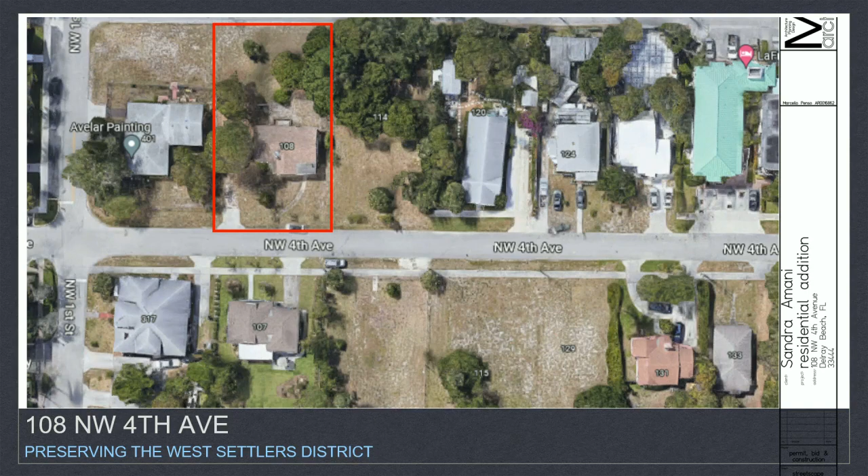Not sure really what to say about this, but in detail I'll just flip through. Please stop me if you have questions, the architect is here and he can answer them. I included the interior just so you could see the layout. I think that the extension adds tremendous functionality to this beautiful cottage, and it will help it work for a modern family to live there.

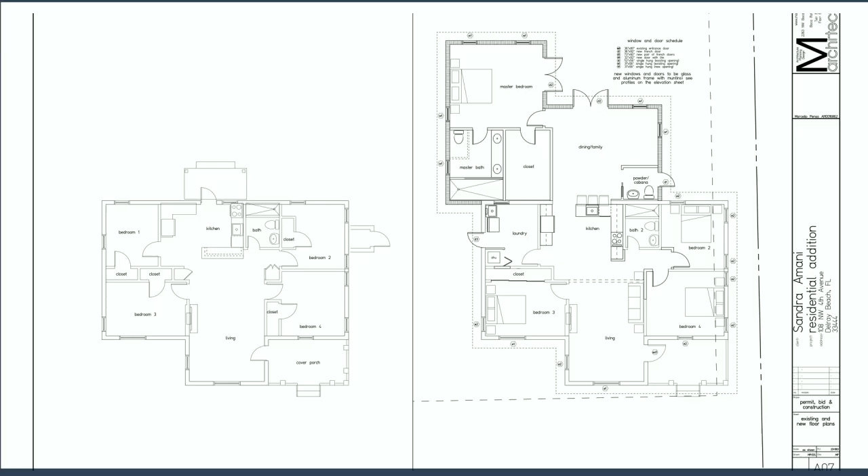Inside, we plan to duplicate some of the traditional interior. We're keeping the fireplace, we're keeping the floors. I think it's going to really maintain the historic look. And that's it, I'm going to sit down.

Once again, this is Agenda Item 8A for 108 Northwest 4th Avenue. Here we have an aerial with the subject property outlined in red. Northwest 4th Avenue is to the east, with Northwest 1st Street to the south.

I'm going to read some brief history on the property. The subject property consists of Lot 15, Block 27, Town of Delray. The property is located within the locally designated West Settlers Historic District and contains a contributing one-story masonry vernacular structure constructed in 1949. The structure's architectural features include a stucco exterior, chimney with flat cap, a covered front porch on the east facade, porthole gable vents on the east and north facades, and flat stucco windowsills.

Here we have the existing survey with the existing structure highlighted in blue. The structure currently is primarily situated on the northeast corner of the lot with an existing nonconformity for the north side setback.

Here we have the proposed site plan, again with the existing structure highlighted in blue, the proposed addition highlighted in red. There are some ground level improvements also proposed, including a driveway extension of the existing concrete apron, pavers around the pool, patio decking, and some stone pavers. There's also a dedication in the rear, which all of the pool and addition comply with.

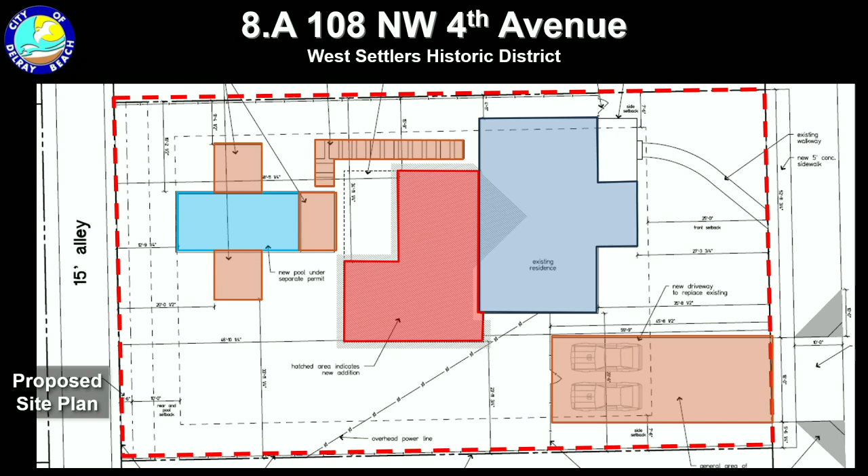Here we have elevations. On top is the existing or front east elevation, facing Northwest 4th Avenue. At the bottom is the proposed front or east elevation. New elements are highlighted in red, including new shutters, railings, beveling of the columns, and a portion of the addition visible from the front facade.

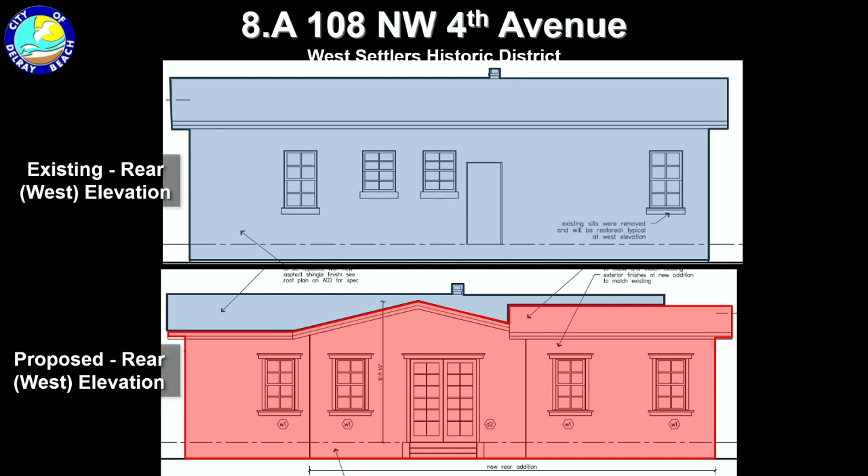Here we have the existing on top, again highlighted in blue, and at the bottom this is the rear where the addition is primarily located, visible and highlighted in red.

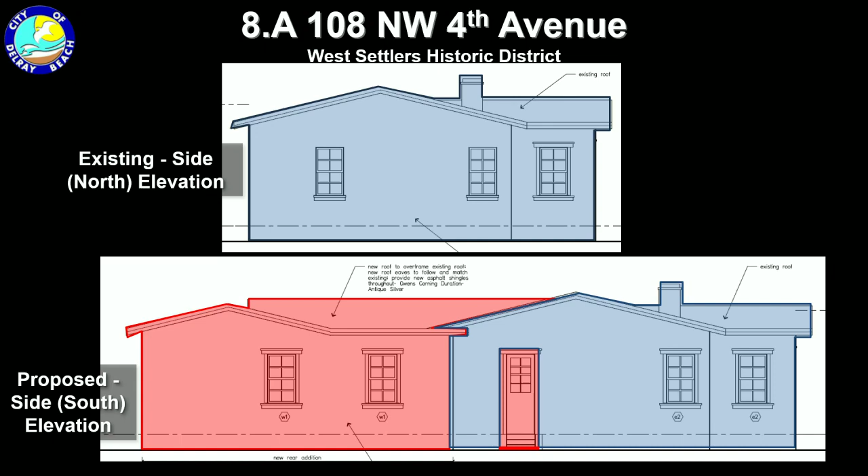Here we have, again, on the top the existing, and at the bottom is proposed in red, the addition on the left, and then a removal of a window for a door on the existing structure.

This is the proposed color materials form. You can see the colors are neutral, muted, and are considered appropriate for this structure and modification.

And we have the Secretary of the Interior standards with the items used primarily for this proposal highlighted in yellow. Same thing here with the visual compatibility standards.

We have a staff report excerpt that discusses the portion of the addition that is visible from the public right-of-way. While it is visible, it is set back significantly and compatible with the existing structure, and helps with differentiating it from the existing structure.

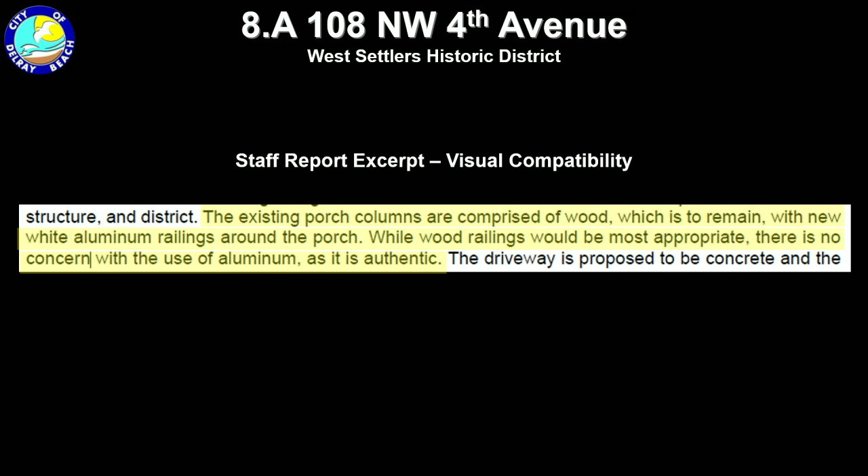And then we have this other excerpt here, which talks about the material of the railings, proposed to be aluminum. While wood is most appropriate, there's no concern with the use of aluminum, as it is also considered an authentic material. And here we have the site plan technical items for the proposal.

And our findings that we used and for the board to use when analyzing this project. And that concludes my presentation.

Any rebuttal by the applicant? Mr. Chair, if you just address public comment first, and then go to rebuttal and cross-exam. She catches me every time.

Any public comment? I see some neighbors back there. Please come up. If you'd like to make a comment, just come up to the podium, introduce yourself and your address, and let us know if you are sworn in.

Good evening. I'm George Williams, along with my wife. Oh, Lottie. And you want to introduce yourself? I'm John Morgenstern. George Williams is the president of the West Settlers Neighborhood Association. I'm a block captain for it. We also live in that same block. If you guys want to just give yours separately, you'll each have 3 minutes.

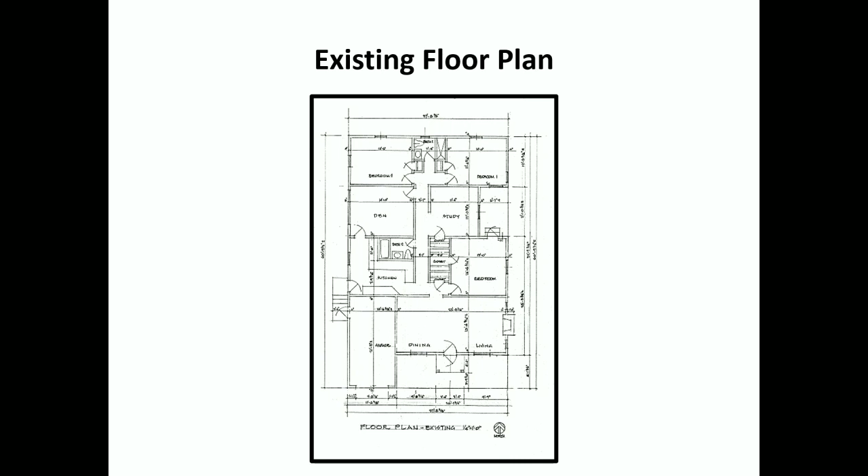That's the plan that you approved. Actually, that's the existing right now - that's the existing floor plan today. You can see the sidewalk out there. That's the proposed.

I don't know if you want to go through the whole scene or not, but basically, it's a simple thing. That's what the house will look like when it's raised as compared to what it is now. We tried to keep within the visual compatibility and streetscapes, everything it required, so I think we have presented what is necessary.

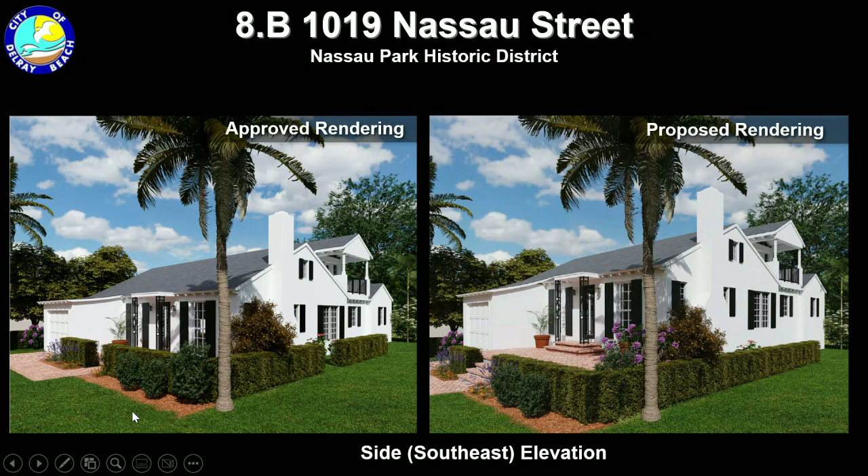This is the requested demolition plan. In addition to the raising of the structure, the request also included the existing first floor where the second story is to be placed. I believe they're requesting demolition for the exterior walls. This was not part of the original approval, so they're bringing this forward today. It's less than 25%, so according to our regulations for historic demolition, if it's under 25%, they're not required to do a full demolition request. But they are coming before you, and this is included in the request today.

This is a site plan technical item we have - we do see the request here, but we're just asking for the demolition plan to be a little bit more clear, just for records, but also when it goes to permit, we want to make sure whatever's being requested is no more than the 25% that they're asking for.

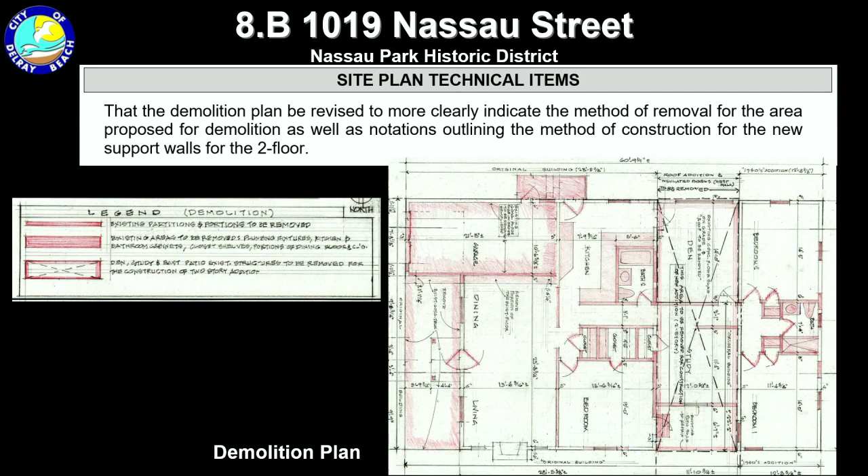Okay, so on the left side, this is the existing front elevation, and then here you can see the proposal. Mr. Simon did mention that they originally came before to request the widening of the garage.

With this additional proposal, they're also changing the height. I believe it was originally 7 feet, and they're enlarging it by 2 more feet, so it's 9 foot total for the height, as well as the raising of the structure. They're also widening this front porch here.

We've also included the approved elevation, so you can see changes that were previously approved. We see the 2nd story, as well as the changes to the driveway, which also included the widening of the garage. Then we have the proposed next to it, so you can see the differences.

This is the east elevation, we see on the existing this window here that was removed. The proposed, you can see the porch here as well as the vertical elevation.

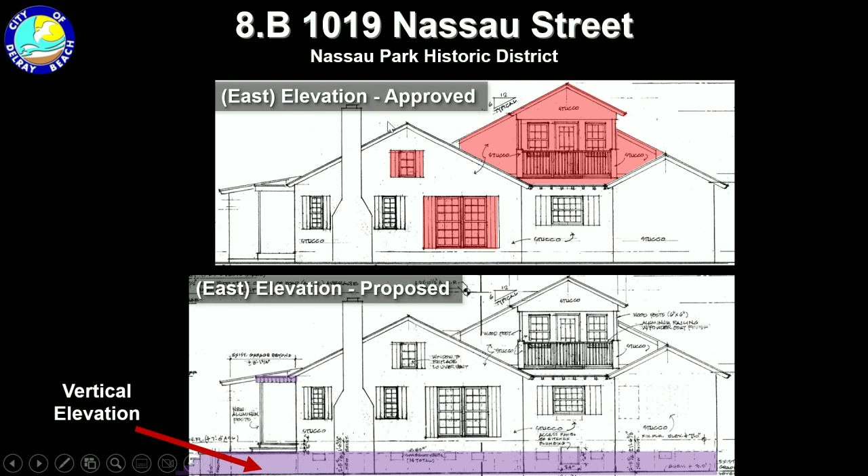The approved elevation for the east, we see the 2nd story. There's some additional changes to the windows, and then we can see the vertical elevation.

This is the existing north elevation on the left-hand side. We can see there's changes to the window pattern on this side. I can go to the other one, and then the proposal, we can see the elevation.

So this was what was approved. We see changes to the windows - they've included the 2 windows as well as the 2nd story.

This is the existing, on the top, the existing west side elevation, and then we see the proposal. As Mr. Simon did mention, they are including a new set of stairs here, and then we can see some changes to doors and one window on the side.

There were previous modifications to the windows and doors that were approved with the last request. We can see 2 more changes here in addition to the vertical elevation and the construction of the new stairs. These are the building materials.

These are the same that were approved, so there are no changes with regard to any materials. So there are no concerns regarding materials or colors - they're all for what were previously approved.

These are excerpts from our staff report. When we talk about the Secretary of the Interior standards, we did have some concerns with the modifications to the windows and doors that were being requested, mostly because in the last request there were already modifications, and because this is a contributing structure, including the front elevation, the more changes there are, the more we're getting away from the historic integrity of the structure. So we did have concerns regarding that.

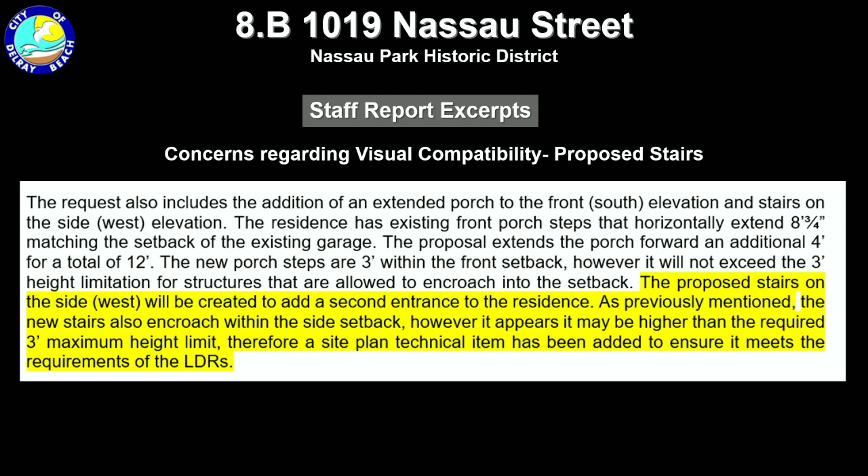We also had some concerns with the stairs on the west side. We have a maximum 3 foot height limit for structures encroaching within the setback, and here it was fine because they did meet the minimum 3 foot, so there were no concerns.

But we had some discrepancies on this side because the finished floor elevation says 4. So we did have a site plan technical item that wants to make sure the site plan or elevations are cleaned up to be consistent, to make sure this does meet the 3 foot requirements.

Regarding visual compatibility, as previously mentioned, we had concerns regarding changes to the openings. There was already an approval to change the width. This request is changing the height too, so this is just more alterations from the existing front facade.

Here was the approval. Oh, this was the existing elevation. We can see there were changes regarding the windows and the change of style of the door on the existing structures, as well as the garage. And then the proposal...

...along with the front porch being enlarged. We also have the height of the garage being modified as well.

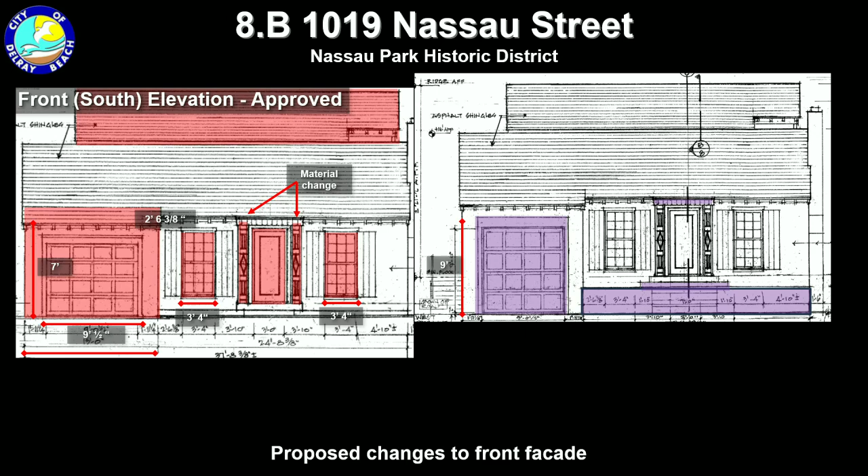Regarding relocation, we do not have any concerns. This is in a flood zone, so vertical elevation of the structure over time will protect it from any flood or FEMA requirement issues. So we don't have any concerns regarding the vertical elevation request.

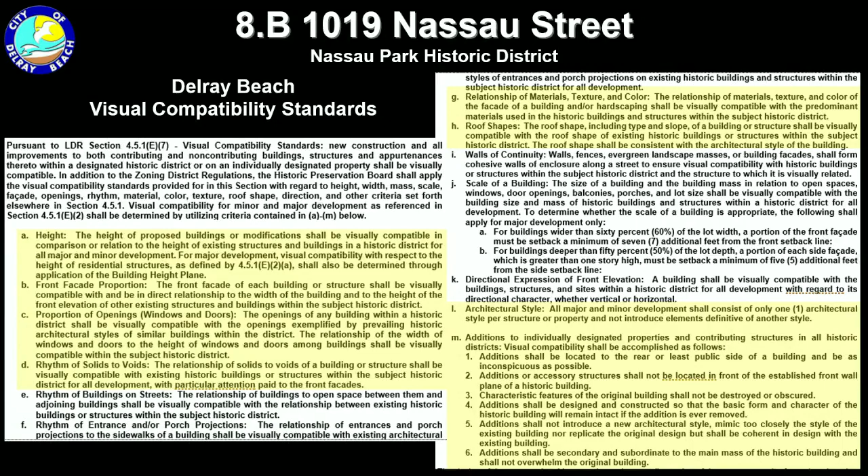Highlighted are the standards that apply to this request, and the visual compatibility standards that also apply are highlighted. These are your findings. And these are the waiver findings, which I think we need to remove, since those were from the last request. Regarding the waiver, it was for secondary and subordinate, so the modifications happening with this request do not affect the changes approved with that waiver.

These are a list of the site plan technical items. And that concludes my presentation.

Any public comments? Yes. Hi. George Law, 46 North Swinton.

I can't imagine you turning down a request to raise a house in a flood zone, but I'd like to read you something just to look at the broader perspective, to keep in mind when somebody asks to raise a house. One of the most celebrated modern houses ever built in Miami-Dade County, by famed architect Alfred Browning Parker's waterfront Sea area home in Coral Gables, appears headed for eradication by a Texas construction mogul who paid $36 million for the masterpiece in August to tear it down. It seems if it falls, as seems probable, the house would be a victim of one of several developer-friendly pre-emption laws passed by the Florida legislature to restrict local officials' once routine zoning powers. This just brought that to mind. There are people who will come and tear down a house like that if they could, and just say well, it's in a flood zone, I can do it, state statutes cover me. Anyway, please approve this.

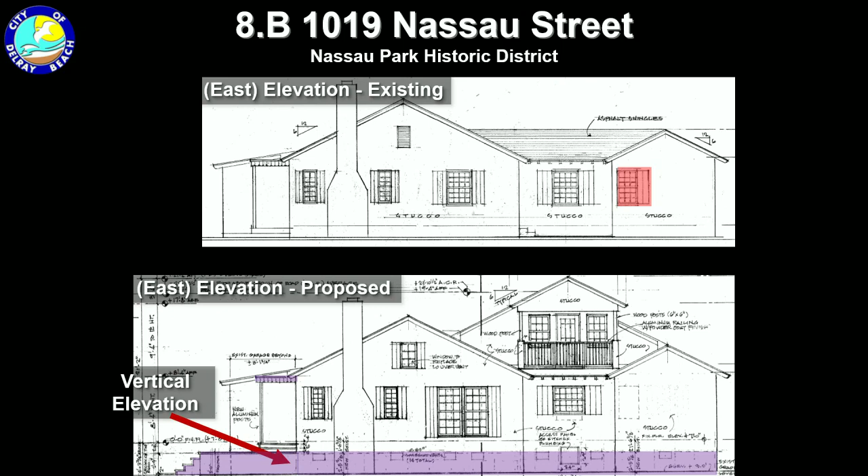Actually, it is on this plan. You can see right here, faintly, this little square or rectangle. They have flood vents underneath, venting for the underneath portion of the house, but what I think was missing is on the garage. In this area, flood vents will need to be installed, so they'll look like the other vents. That's a FEMA requirement as well, because the garage will be remaining at the existing finished floor elevation.

Those were the rebuttal items that I had. So, thank you. I think we're ready to discuss at the board level.

Anybody want to go first? No? We can vote for Chris to go first. No, I'll go first.

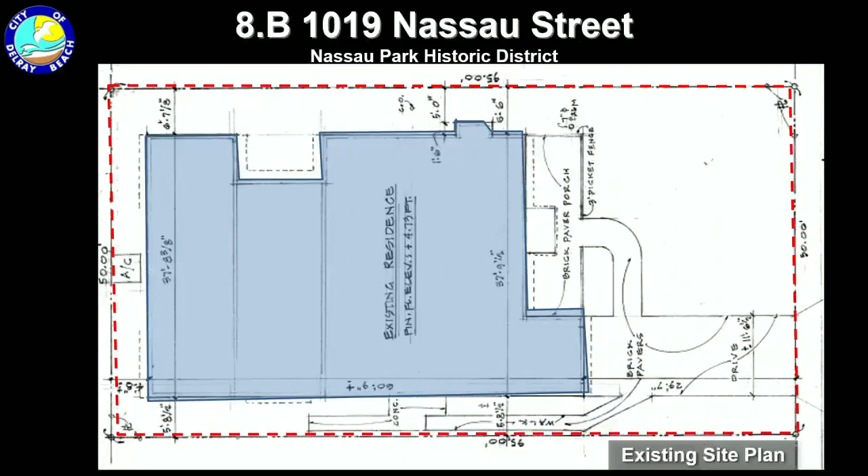I can see how we arrived here. It's a beautiful home, a beautiful street and neighborhood, and it would be a shame to lose this house. There aren't many alternatives, and I think this is probably the best one. It does affect neighbors, and that's unfortunate, but to preserve the house, it's going to have to come up. We see what happens when it rains here, and it's real. So I have to support it. I think it's going to be a beautiful project and an asset for the neighborhood.

Chris? I agree. I think raising the house is the practical approach and the right thing to do for the long-term health of the structure. It's unfortunate that the neighbors might have to see a little bit more. There was one image showing the neighbors' houses, and it looked like with the raising, it's still at the same height as the neighbors' elevations. Is that accurate? It was showing the streetscape with all the neighbors' houses, and it looked like the roof line was going to be at the same height as the other neighbors' houses.

Oh, you want to go to that? Katharina's going to go to that. She believes it's in Roy's drawing, so we'll bring that up for you. Mr. Simon, if you want to come to the podium, if the board has a question, please come to the podium.

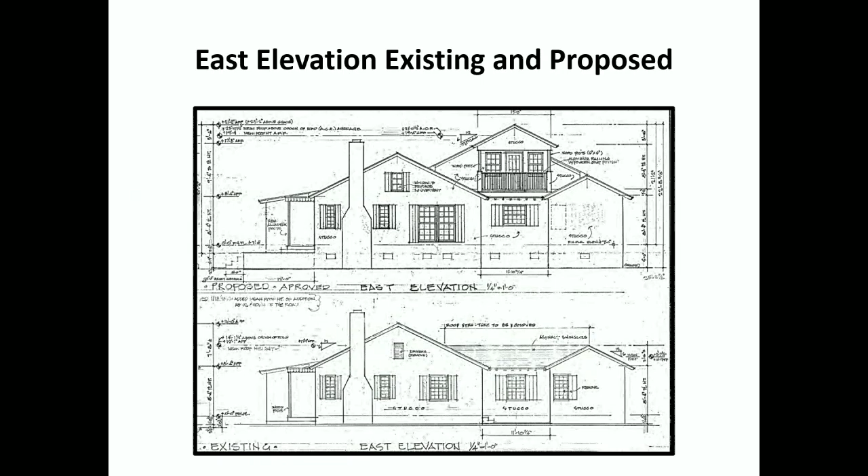And if that's accurate, it shows that even with raising the house, it's still at the same level as the direct neighboring houses to the left and right. It will be higher? Okay, I wonder what that was showing. These houses, when originally built, were built about 18 inches above crown of road. Nassau Street comes down on a hill from A1A, so it's lower at the west end of Nassau Street as you get closer to Venetian. There is flooding occurring in this area, but these houses are all at that 18 inches above crown of road, so they're about 4.5-ish feet. All of them are.

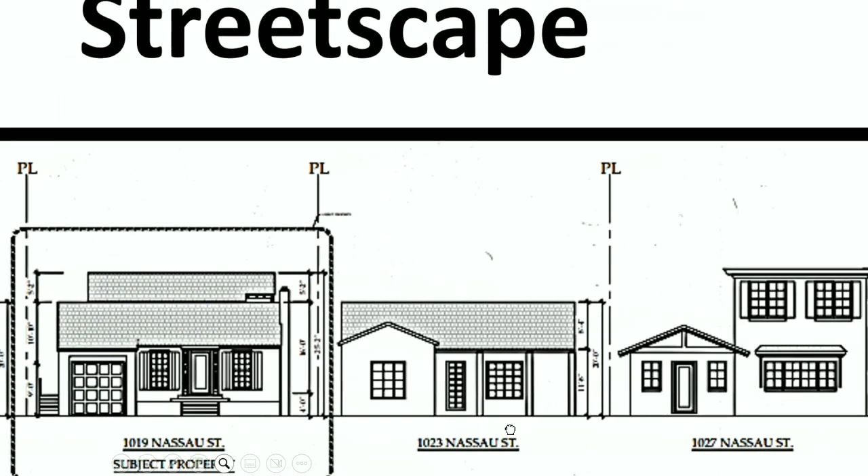There it is, this is what I was looking at. So what you're seeing here is that the house is still touching the ground where the other houses are. Can you zoom in a little bit? That's what I'm going to do. But the difference here is you can see their porch, that's what all of this is. So really the front door is kind of the test you look at. Look at how much higher the roof line will be. The whole house should be lifted up from the neighbors. So you can see in these houses where their front doors are, this front door is up in the air.

Now with the Secretary of the Interior flood adaptation guidelines that we've utilized in conversation with all of our owners facing these challenges, there are a number of different approaches. Most of those approaches work better for historic properties not almost at sea level. Outside of this area, you really can't abandon the lowest floor, which a lot of buildings do—they abandon the lowest floor, make it storage or parking, and utilize upper floors. There's not a lot of room around the perimeter of this property for trenching, and there's a whole method of how you do resiliency with that approach.

Most of the approaches that are going to work for our area are vertical relocation, vertical elevation, raising the building in place. The alternative is they could leave the house at its current finished floor elevation, but they would have to seek a variance from this board in order to allow the structure to remain. This board's approved those types of variances in the past. It's just what the board decides with the owners.

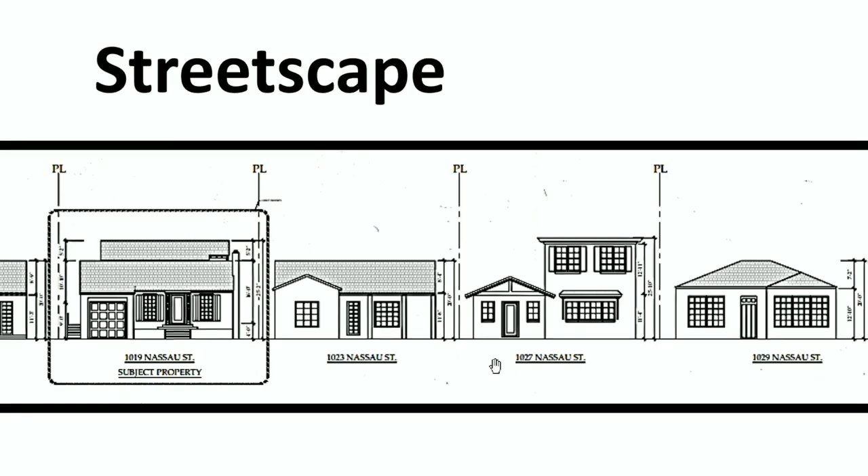I wanted to ask staff if they had any issue with the 9-foot height of the garage, because it does feel like it's out of scale to the rest of the house. According to the Secretary of the Interior Standards and Visual Compatibility, it's the front elevation of a historic structure, so it's up to the board to decide whether that's appropriate.

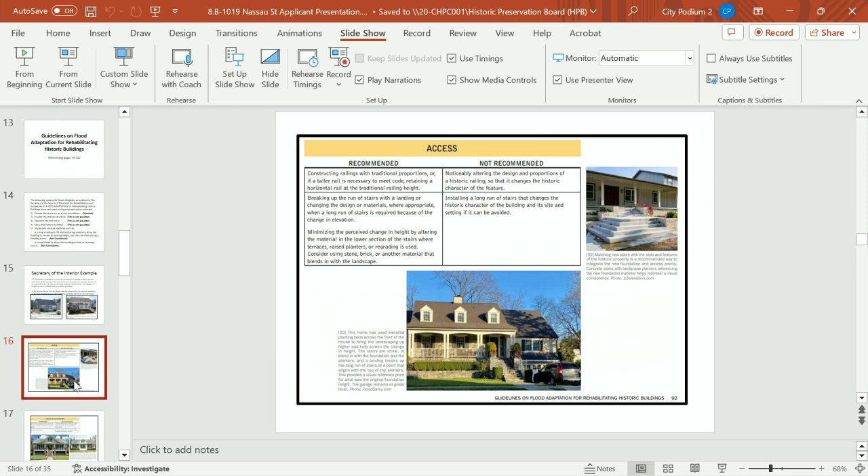That's a concern that I have, is that if you put a person to scale, a 6-foot person, next to a 9-foot garage, it's a very large garage. You can tell with the two elevations on my screen that's going to be a drastic change to the front facade. I do appreciate the owner not raising the property grade. I think that's going to keep consistency along the streetscape. And if you did do that, you'd have to retain your stormwater, and you can't do that. So I think raising it is the only approach.

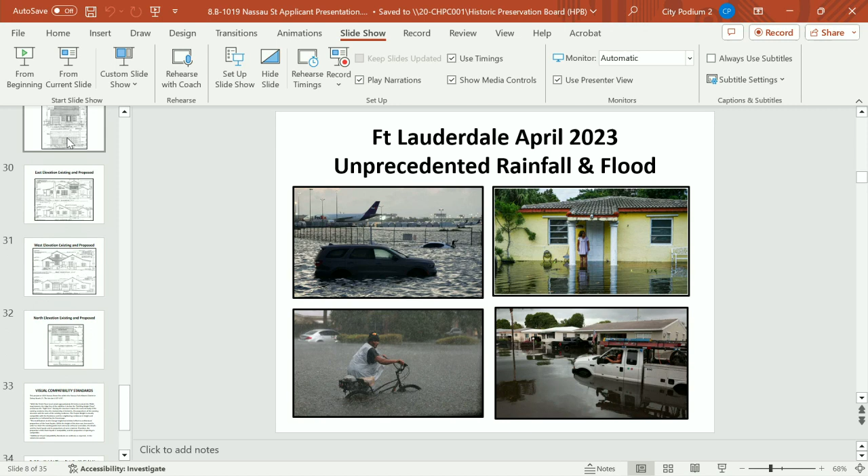I wonder if raising the driveway alone solves the answer. Probably not, but that's the one concern I have, with the garage door. I went through this in my mind and realized why Roy came up with this. It really has to do with the rhythm of that front elevation. He had to maintain that when he raised the house. A 9-foot door on a house like this is very unusual in height, but it makes sense for this elevation. If you see the relationship with the windows, before and after, the relationship is maintained. Roy, you can speak on that if you like, but that's what I see.

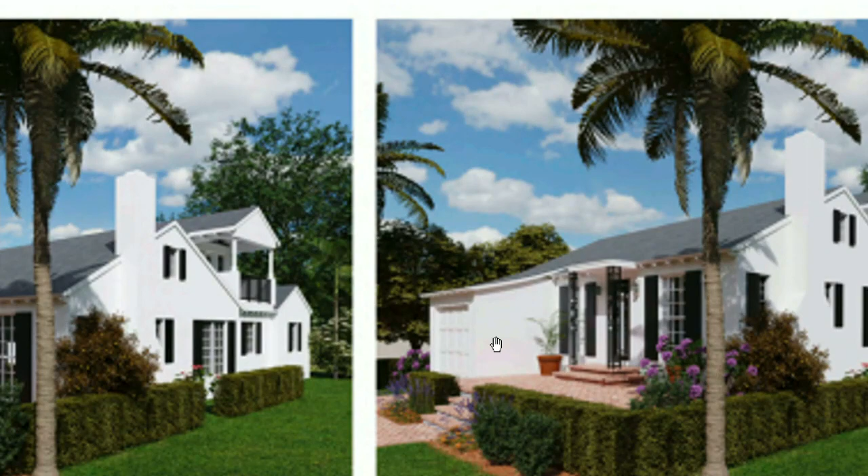Well, I guess we studied that. We felt that if we raised the garage floor, we'd almost have to raise the grade, and that would be a no-no. So we were kind of stuck between a rock and a hard place. I could try elevating the garage and raising the floor, getting some kind of agreement with the city, but then the city engineer gets involved, and I don't know if we can solve all of those people at the same time.

We've been working on this thing since April. Actually, we started in 2021. So we just, whatever you'd like to do. I mean, we tried to do our best to solve the problem without bothering the neighbors. Sure, we can try it, but I don't think we'd gain more than about 3 or 4 inches.

While Roy is here, may I ask a question? Go ahead. So Roy, when you're vertically elevating this whole structure, how are you increasing the height of the garage walls? Are you adding space at the bottom? The wood frame will rise. And then you're going to add more down below? The stem wall will come on up. Yeah, the same stem wall that's being built for the rest of the house.

So you could bring the top of the garage door opening down a little bit so there was more of that header. We could reduce the head, yes. But I wanted to kind of keep it close to where the head of the windows are.

I think it's a thoughtful comment by the board. I think I can make an adjustment on that, maybe add a 4-inch slab to raise the floor a little and get a little apron on that. I'm thinking maybe instead of doing any kind of floor changes or ground level driveway changes, the change that may appease the board is that you frame the top of the garage header down a little bit so that there's more space at the top, but the garage door is still an 8-foot door. That was really my intent, to try to get it more in proportion.

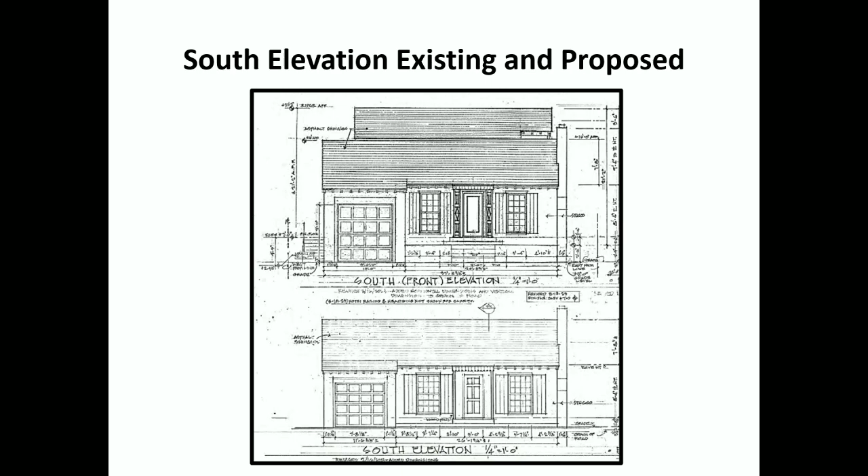But so I'm okay with a lot of the little tweaks that have been made to the windows and the doors. We got to take the big picture here. The house is being saved. The basic structure, form, size, footprint of the house is staying the same. There's going to have to be some accommodations made to make that happen, and I'm okay with it.

I understand, Chris, your concerns, and I agree. A 9-foot high garage door is high. It does sit a little bit more prominently forward of the house than the front door, which is, again, one thing we don't like to see in a historic district, but that's the way this thing was created, and I'm not going to second guess Sam Ogren, I believe, who designed this.

If somebody wants to craft a motion to lower the header a little bit, I'm fine with that, but overall I'm in support of the project. Kristen, did you have any other comments? No. Okay. Ivan? So I do have a few comments.

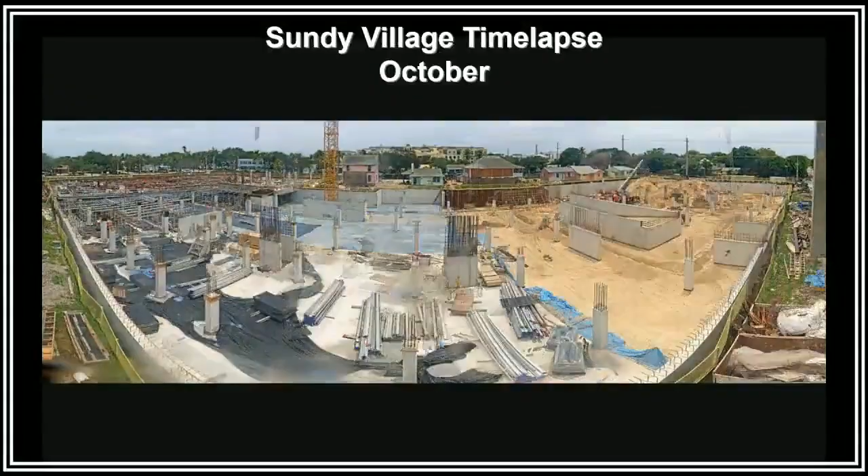Wow, what a change. You can see the underground parking garage is going in. That was October, and they are making fast paces on this. Typically they're about every 30 days we're getting them.

That's impressive. We have a once a month construction meeting with their team, and Bob Morgan, who's the lead, provides us with these time lapses.

So we're really proud that they've invested and taken the time to put cameras out on the site so we can see. I do have to probably at some point tell Bob he's going to have to move the camera, because once the buildings get in, we won't see over them. So in January, we'll likely bring the collection of time lapses we've had thus far, so you can see them all together.

So Mike is going to present. Hello. Just before you get started, Mr. Covelli, could we do ex parte communications?

I was going to say that. I appreciate it, thank you. None. None. None. None. None.

Okay, Mike Covelli, Covelli Design, 1209 South Swinton Avenue. Today we're going to talk about Block 61. As you saw, construction is going fast and feverishly, and in any project, when you have construction, you find things in the field that need to be adjusted. That's pretty much what this is all about.

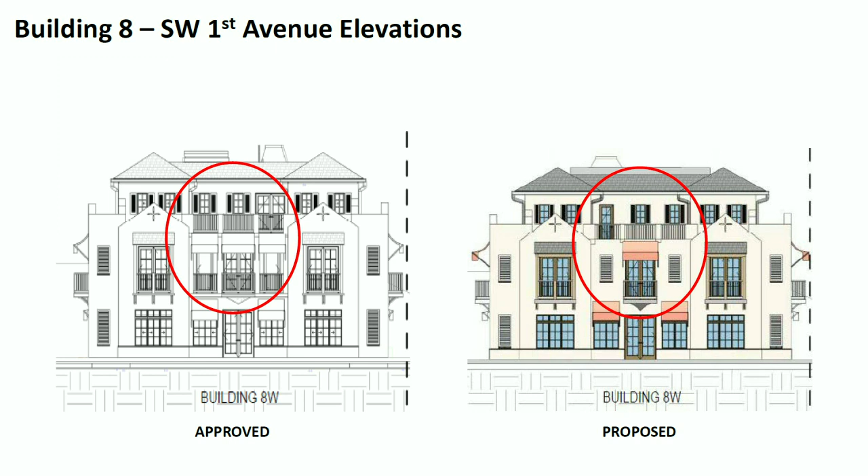So the elevation change that we had to do because of the way the stairway functions is essentially we took the windows on the left and right side of the center core away and put shutters up similar to the ones on the far left and far right. At the top there was a double door replaced with a single door, which I think has a little more continuity. This is because there's a stairway behind it, and it makes the building function properly.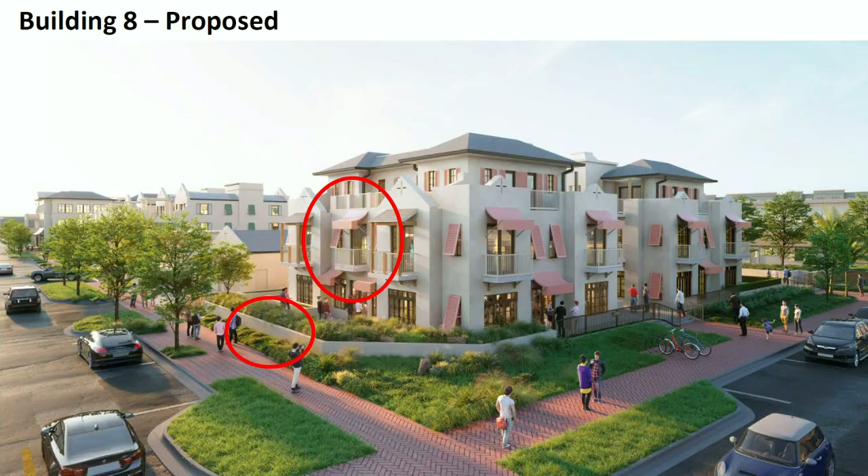This wall gets extended, and you see the triple awnings in the windows that were changed to a single awning with the planter box closed in and additional landscaping placed in, and the cut is farther down for the ramping. This is a side-by-side showing the difference in the upper door change and the awning change on this facade. The landscaping doesn't change much other than that planter in the front, and this is indicative of the landscaping that will be installed.

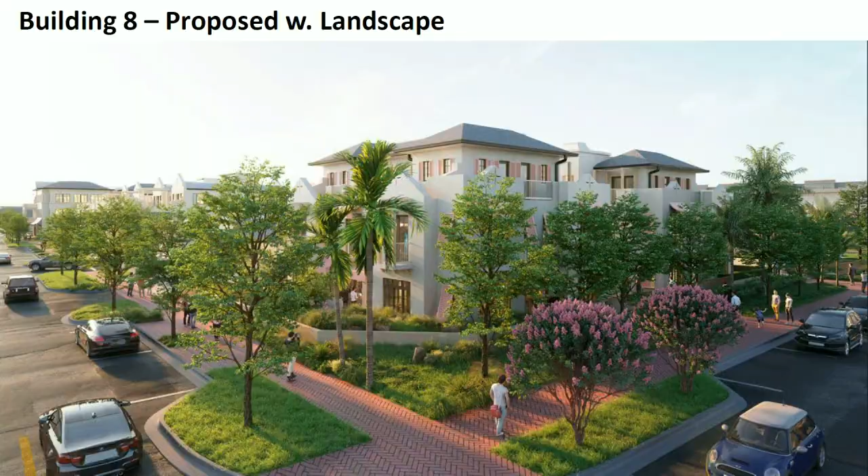On the Paseo side, which is the east side, it's the same changes to the facade in order to be consistent with the architecture of the building. Here it is again with that same 3 awning configuration, and here's the 1 awning configuration side by side so you can get an idea of the change, which is very minimal. And there it is with the landscaping, which isn't really affected by this.

So that's my presentation. If you have any questions, I'll be happy to answer. Thank you, sir.

So the request is for Sundy Village, this is block 61. I'm not going to go over the whole history, this is 4 pages, so I'm just going to move through it.

I'm just going to give you a brief overview of the request. We do currently have blocks — this is block 61, that's the request for tonight. Blocks 69 and 70, as well as some other modifications to block 61, are currently in, and we're working with the applicant on an additional, larger COA that you will see within the next few months.

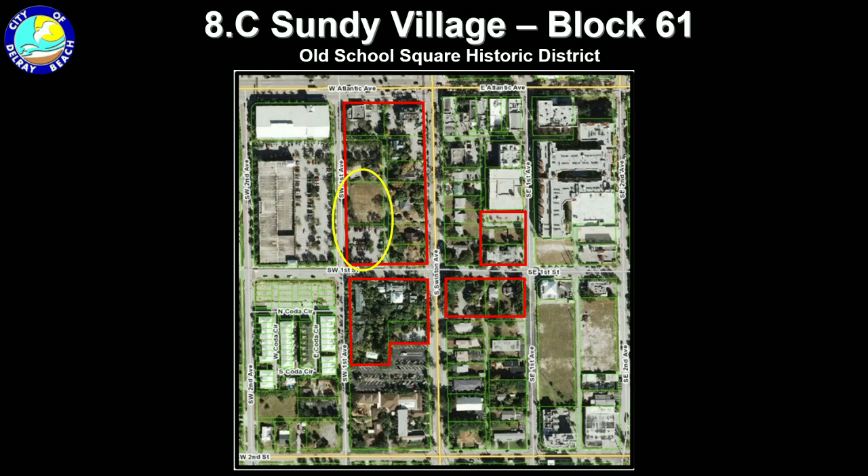As Mr. Cavelli did say, block 61, the building 9s and all three building 8s are currently in for permit. At the time of permit there were some comments regarding fire, so they had to put additional stairwells in, which affected the elevation of the building. These are infill structures, not historic, they're new builds, so there's no real concern with regards to the request, but because these are exterior modifications they had to come before the board. Because they're already in permit, we figured we'd pull some of the requests out for the elevation so we can get them approved, so they can get their permit and continue on with these structures.

So this is block 61, the areas of the request. Here we have 9 north and 9 south — there was some landscaping and hardscaping modifications, as well as some slight elevation changes with the doors and windows. Then these are building 8 north, 8 west, and 8 south. Those have elevation changes, as Mr. Cavelli mentioned, as well as some slight hardscaping and landscape changes.

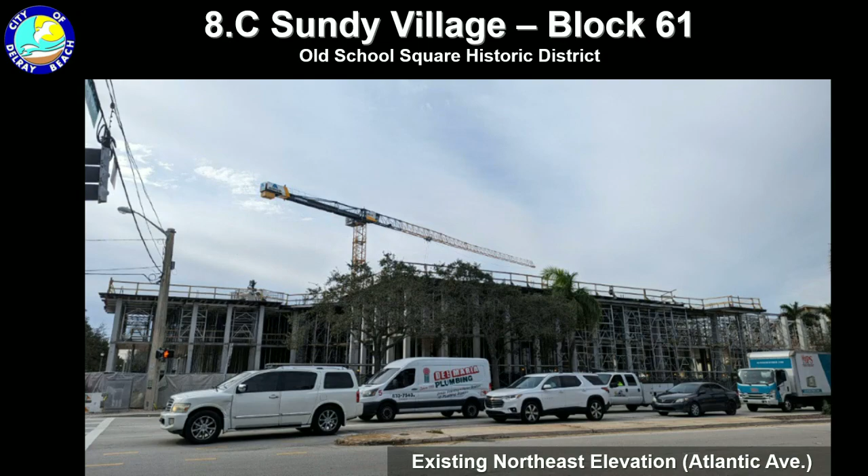So we have some images of what's existing on site. You guys did see the time lapse. This is the view when you're looking at it across Atlantic Avenue. Here's another one from the intersection, getting ready to cross Swinton and Atlantic. This is on site, the east elevation, where we can see some of the historic structures, and then looking west, this is what we saw when the underground pieces were coming together.

Some more images of the southeast elevation. Here's the southwest of the site, and you can see all the historic structures. Over here is the area where all the building 8s, and to the north of that, the 2 building 9s, are going to be constructed.

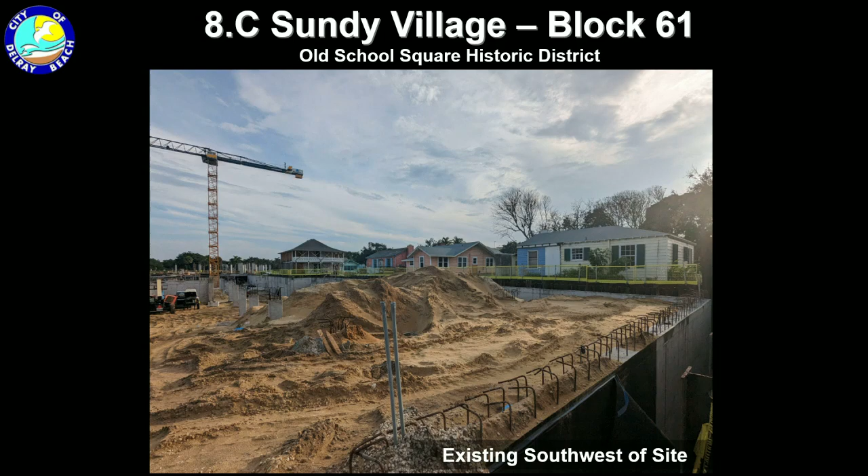Okay, looking towards the west, you can see another image, and this is the area for the subject request. So we're going to go through building 9 first.

So these are the elevation changes. Mr. Cavelli did mention, I don't think I put 2 of the doors that he mentioned, but I'm glad he included those in the request for I think the north and the south sides that I did not get in our presentation. So these are the north and south elevations of building 9 south.

So we can see how on the existing ones, we do have the arch doorways. There's only 2, as you can see, and then this is as existing. I believe just the grille was removed from this one, it was for fire and safety purposes, so that was removed.

And then we see the change in the elevation here from the 2 arch doorways, and we have 4 windows total created, and then the door that also matches the other elevation.

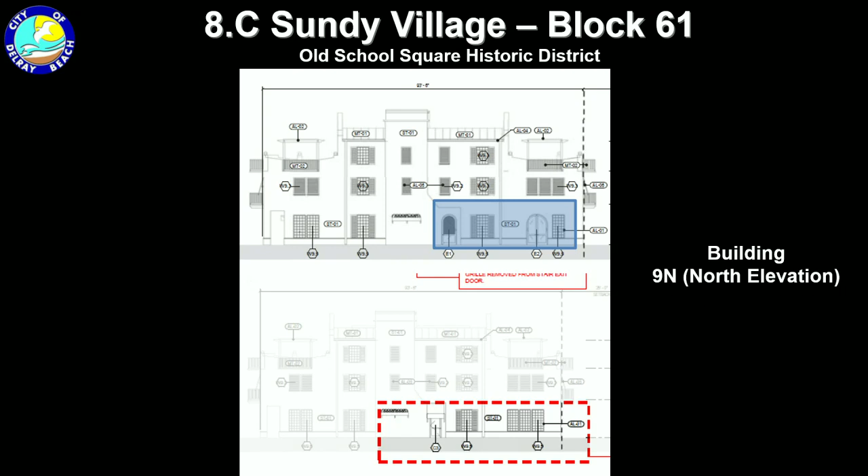Okay, this is building 9 north. The exact same thing, the request was pretty consistent. Whatever was changed on one elevation, the rest were to match.

Okay, and then this part of the request is for the 3 8 buildings. So we can see here, I think it was just one structure that didn't have the shutters on the top, so we see them. It's consistent, so we see this side that had the shutters for the doors, this one didn't, so they're just adding shutters for them on all of them just for consistency purposes.

Mr. Cavelli did mention that on the east and west elevations that the structure did enlarge an additional 2 feet. We do have a requirement for building widths, the max is 60. There's no concerns regarding the change of the width, I think the total was like 44 feet, so there was no concern with that.

Okay, so these are the east elevations of Building 8 South and 8 North. So here we have the changes here. We have double doors on the top with windows, and then Juliet balconies with awnings. And then they've been changed for the vents, and then where the double doors were changed, there's now a single door, and there was kind of a reconfiguration of the doors and windows here.

There we go, okay, so this is the west elevations, this is 8 North and 8 South. Also, for life safety purposes, the stair orientations were reversed. There was a separation of stairs requirement, so in order for them to meet that requirement, they reversed the stairs. And then the double doors that were originally existing are now single doors.

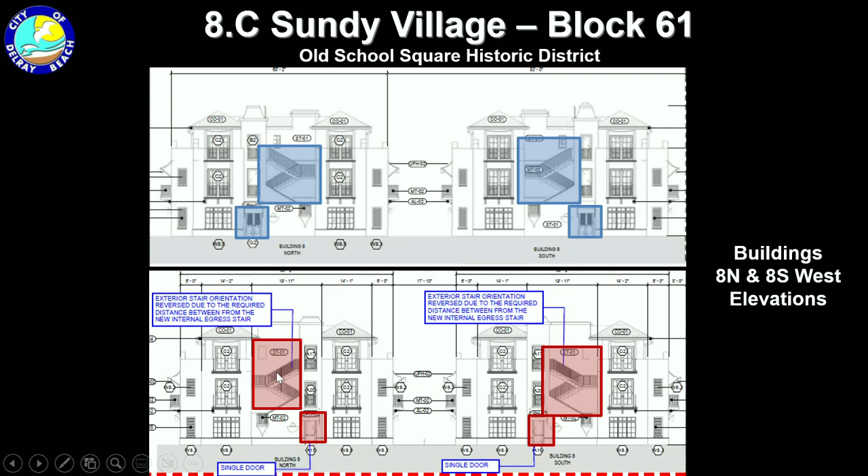Okay, so this is the south elevation of Building 8 West and 8 South. I noted the change for the width changes, but there's no exterior changes to this side of the structure.

Okay, so the mechanical yard, this is the south elevation, the mechanical yard, and then Building 8 North. I didn't note any changes on this side for Building 8 North, but as Mr. Cavelli did mention, there were some changes to the mechanical yard. The trash compactor area was enlarged, and the generator was slightly shifted more north.

So we see here we have the existing roof here, it doesn't go all the way through because we have the trash compactor area, and then the generator was existing here, and then we see the door into the generator area.

So when the generator was shifted, it's behind this section right here. The door was relocated here, and then we can see the roof covering to enclose the entire trash areas because it was enlarged.

Oh, and then okay, we see. Let me see. Shutters, okay, and the shutters were also added for consistency purposes on the 3rd floor.

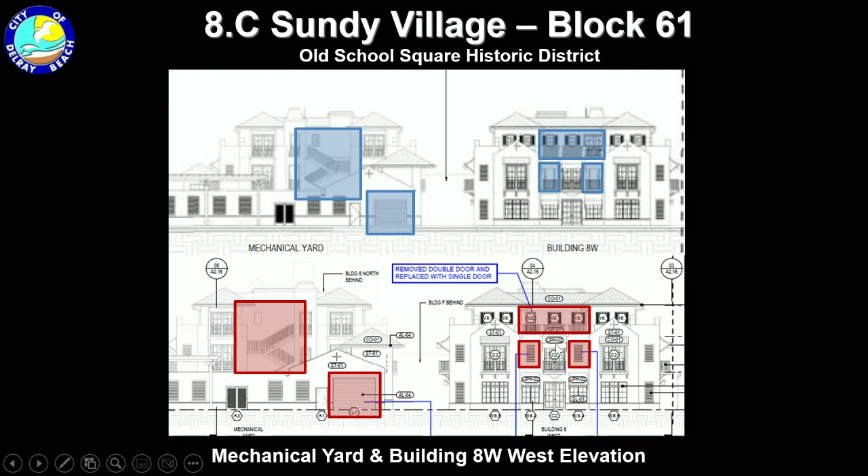Okay, here's some aerial views of the mechanical yard. So originally here, this was just the trash compactor area. The open air generator was here, and then we have the door into the generator area.

And then we see the trash compactor area was enlarged, the door was relocated here, and then this is where the open air generator is proposed now.

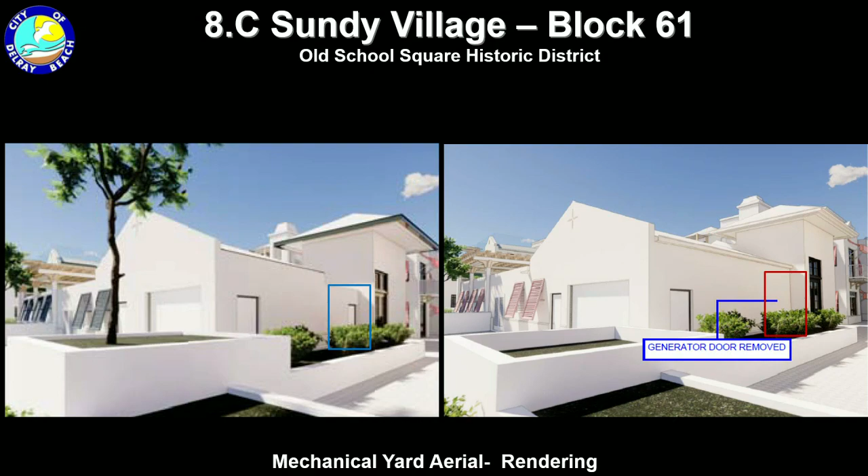Okay, here's another aerial view where you can see the change of the doors. So these are landscape and hardscape changes to the south side of Building 8 West and 8 South.

So here we see the existing proposal. We did note during our review that the walkways didn't seem to go anywhere. It seemed like it was a little overly landscaped, and I think that was something we maybe didn't catch in the previous review. But with the proposed hardscaping and landscaping, they've changed the walkway so you're able to get out the door and lead into an existing pathway.

So these are the landscape and hardscape changes affecting Building 9 North and 9 South. This is existing. They originally had two walkways here, and they've just been changed to one, and as Mr. Cavalli mentioned, their ADA access was relocated here.

These are the Secretary of the Interior's standards. I did mention earlier these are new construction buildings, so there's no concern with historic integrity or changes to the structures because they haven't been built yet. But for visual compatibility purposes, we did look at this regarding not so much the streetscape, but the historic structures that were on site.

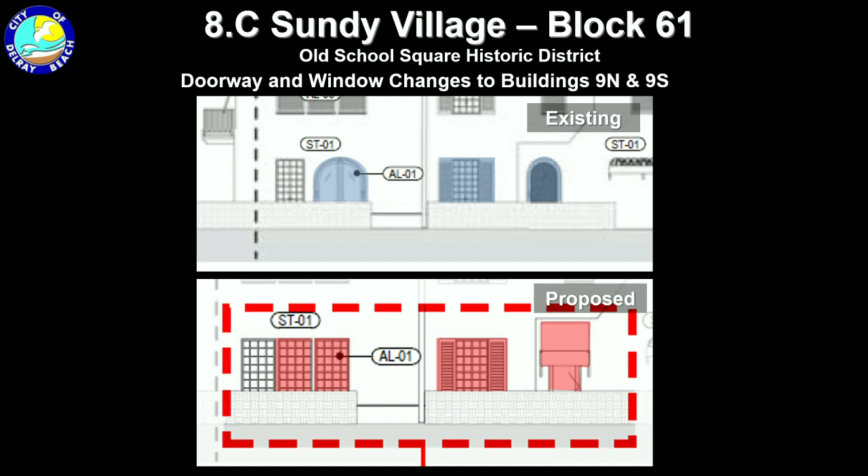Then going into the Building 8s, the removal of the Juliet balconies and awnings in replace of vents. Once again, that's also a design style we thought catered to the Anglo-Caribbean style, so we had concerns about the removal of those.

I believe so, yeah, well, they're Bahamian shutters, Michelle said. So these are the findings, and that concludes my presentation. Thank you, that was quite extensive.

Any public comment? No public comment. All right.

Any rebuttals, Mr. Cavalli? I have none. Okay, and staff?

No rebuttal from staff. I have kind of a general question, and maybe Kelly and Michelle can help me with this. It seems like much of this is more or less administrative in aspect, making the doorways square, or the compactor had to be moved. What caused that to rise to the level that it became a board issue?

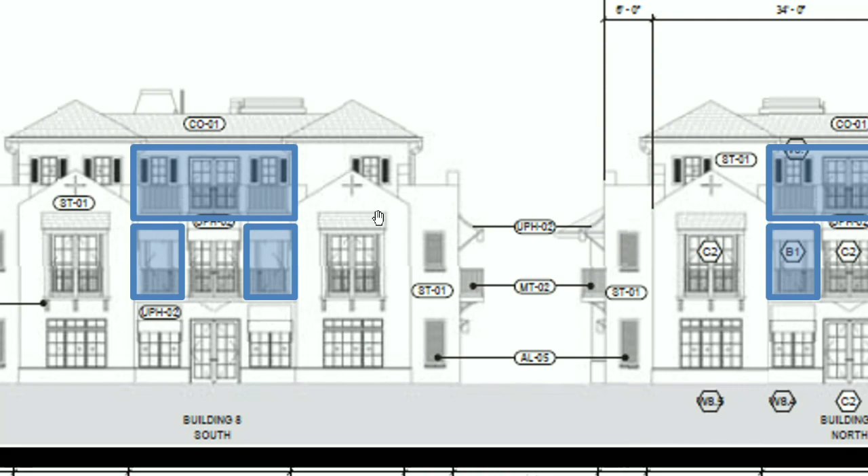Thanks for clearing that up. Any more? Nope, not right now.

To be returned. Yes. Chris?

Yes, I'm okay with the changes of taking away the arches and keeping it more simple. I think having the arch next to a rectangular window was a little much, so I'm okay with that.

I noticed in one of the staff comments that when I see landscape, I just go right to it. It says the addition of landscaping and palms to provide light and partial shade for the areas suggested would be an improvement. What area was that for?

I believe it was for the Building 8 landscaping. Let me get over here. Is it this one? Yes. So they do meet all requirements, but it was mostly just a suggestion to maybe give a little bit more shade, but the senior landscape planner did review this and it did meet all requirements.

I'm very confused by this drawing. I don't believe any of those trees are being removed. The building got wider, and on the north side of the northernmost building, the little skinny planter kind of went away, and it's just walkway in there. But on the south side, the only thing that got reconfigured was the walkway.

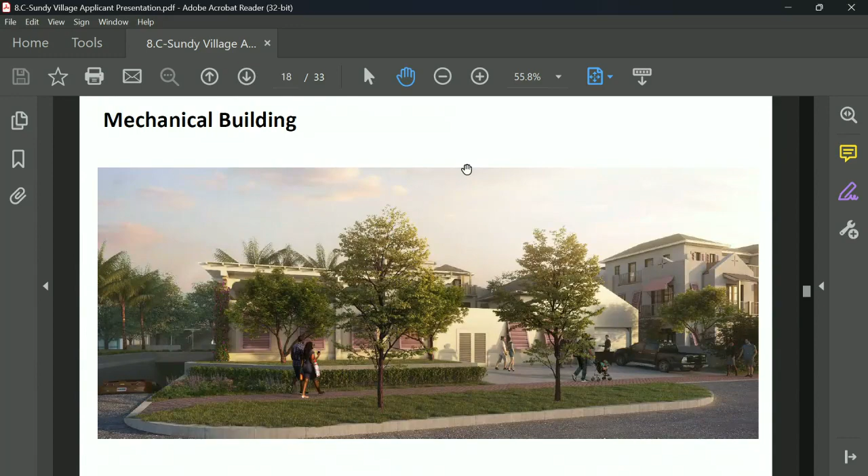If you stop back, go here, ahead. Here, let me. Here now. Right. I went too far. Hang on. Which way am I going? I think I got to go backward. I'm sorry. Yeah, there we go. Right there.

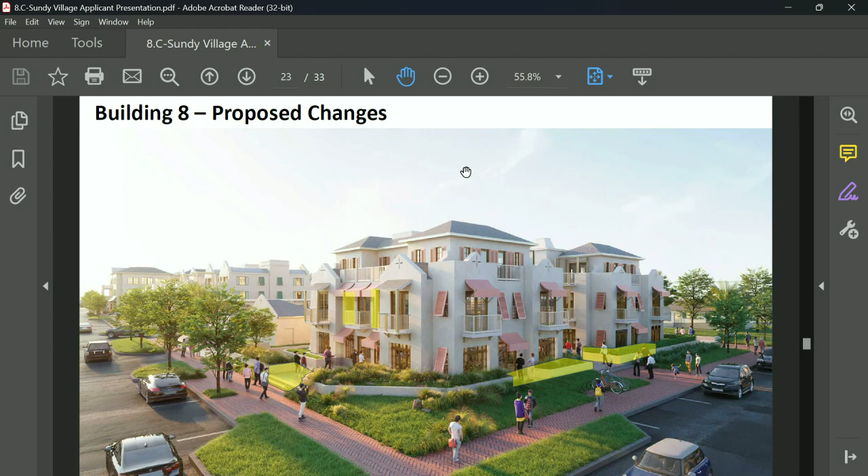Those sidewalks got reconfigured where the yellow is, and that's the only place that it really changed. But let me get to here. Here you go. Here, if you see where the yellow is.

Can I zoom in here on one of these? Yeah, like say right here. In this one, where that yellow square is in the walkway, that walkway disappeared, and that became more landscaping.

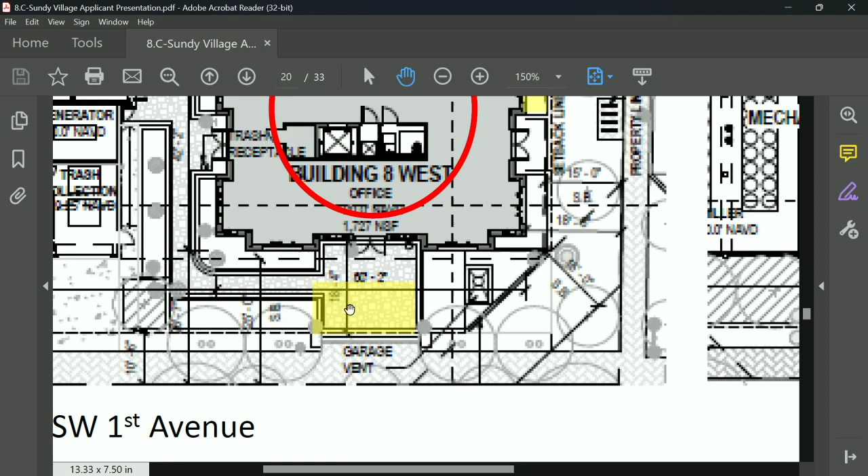So in that area, landscaping increased, and the entry to that sidewalk—if you slide over, Michelle, could you slide to the right, please? You can see where the landscape area got larger, and then the yellow is where the ramp was moved to, but it's narrower. So in this particular case, there was an increase in landscaping on this reconfiguration.

So it's really just pushing things around. Now you can see where the other yellow square is to the upper right, and you can see all the trees are still there. It's just the sidewalk got reconfigured.

I feel like the comment, and maybe what we could do, because this would be something that could be handled administratively, is maybe we could have a conversation with David and Mike to address it. I'm not sure what he meant, Mr. Glover, our senior landscape planner, but I think what he was talking about had to do with the center courtyard. So I don't want to guess at the board meeting.

These are things that we can address if the board gives us direction to handle administratively. And the center courtyard didn't change. Okay, so I don't even know—well, I think landscape area was altered, or where hardscape was added and landscape was removed, maybe it could be thought of if some additional landscape areas could bring some more green, because it seems like maybe there's more hardscape here than there was before. That's exactly right. If I may address that?

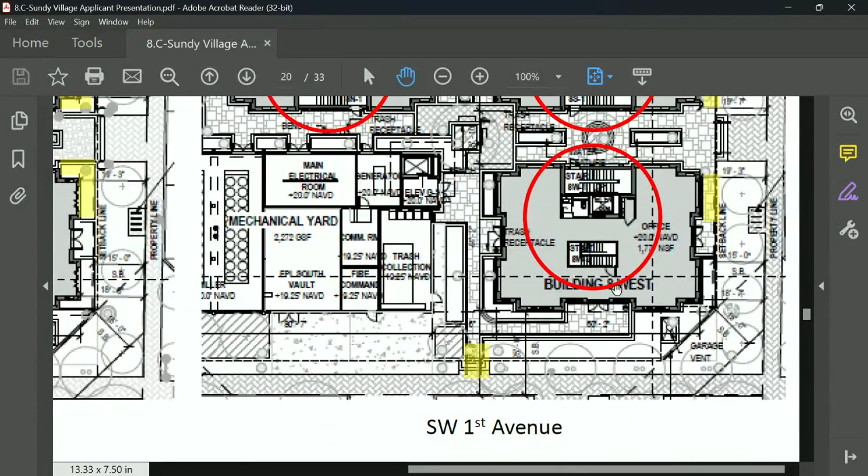Well, I'm confused now. I still would like to see maybe some more landscaping on the facade. I do see some areas where it could be added, and I'm going off staff's recommendation that additional trees could help soften the corners of the building.

So it's something I think would be helpful in certain areas, like these yellow areas right here facing Southwest First Avenue. The foundation planting isn't against the building, the walkway is, and the plantings are pulled away from the building. They're flipped, which was acceptable. Right, because you still have the very large landscape area on the street side.

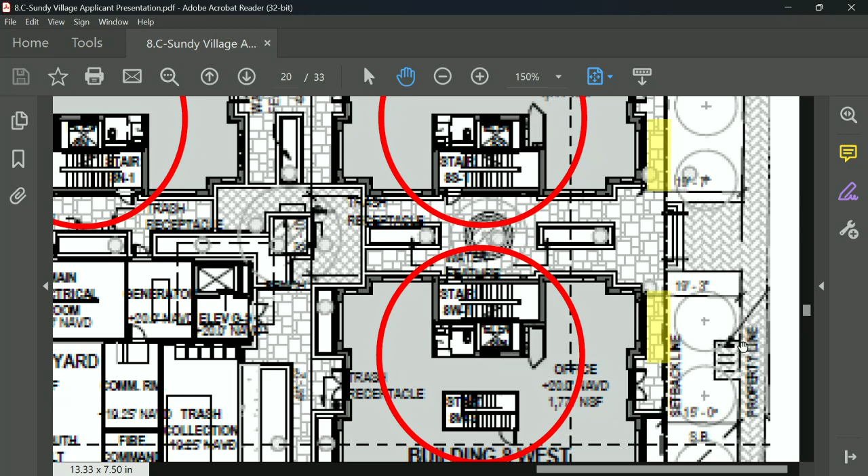But the one slide that shows before and after, where the before has trees and the after just has hardscape, that's the one that confused me. That confused me as well. It was different scales—one is zoomed in, the trees are still there, you just don't see them. I think staff used the word 'over landscaped,' and that's what caught my attention. No, the cropping is wrong because the trees were cut off of the slide.

Actually, I don't know that it's fully a cropping issue. I think this is a site plan compared to a landscape plan, not a landscape plan compared to a landscape plan. Right, that should have been landscape to landscape. So the answer is those trees are not disappearing. Correct.

Any comments? I don't have any. All right, I think we've settled everything. Kristen, since you've been leading this, do you want to make a motion?

Well, can I just ask something? There was still the comment about extra landscaping being a possible improvement. Is that something we'd like to consider adding as a condition that staff can approve? I think it could be some direction that you provide. Do you think it needs to be a condition?

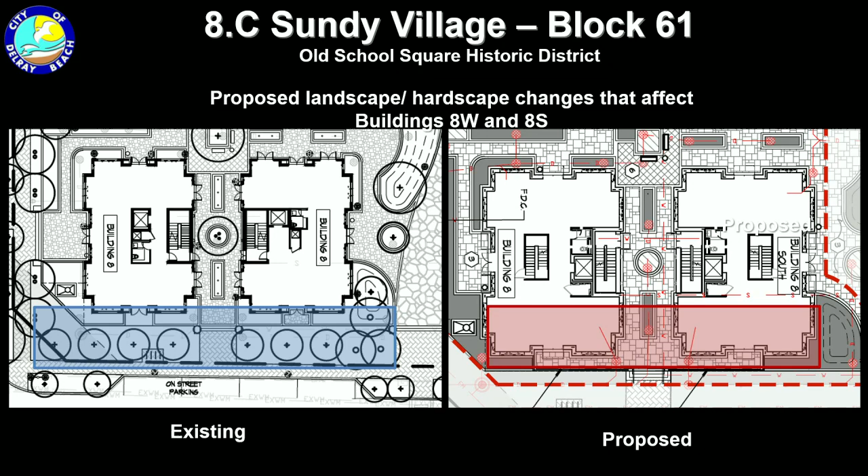Here's an item to keep in mind: these buildings are on top of a parking deck, so adding landscaping isn't just digging a hole. It's a whole other element—providing a planter that has a drain at the bottom, a drain at the top, certain kinds of configurations. So we would really like to leave the landscape as presented, because even adding a small planter in certain areas is a huge undertaking.

And that includes the corners that Chris was asking about? Yeah, because what we've done is move out just a couple of the corners, but remember, when you start stacking more landscaping, more planters, and more weight, at some point you've got to start looking at structural elements and all those things.

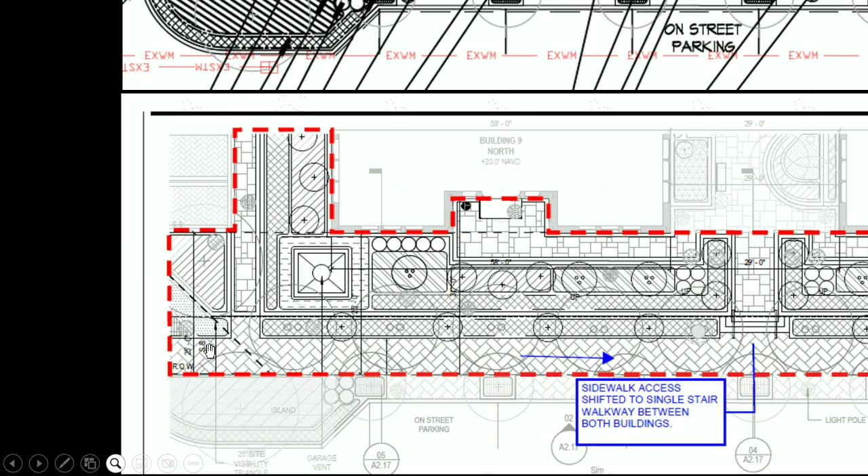I totally understand that. I just feel when I put myself in this space, walking up these steps into that center courtyard, it feels like so much hardscape. Once I pass that tree-lined area, I get into the space and there's no landscaping anymore. What are those center rectangles—is that a water feature or landscape? It's landscaping. So that's the only space with it?

May I say something? Yes, if he has a question. Do you have a question for him? Yes, I'd like to hear your thoughts.

Some of this could be handled with container plants too. I think exactly, I would just like to really have the opportunity to understand what the senior landscape planner identified, because we may be completely missing the mark. But he was talking about additional shade to help soften the buildings.

So, I think you originally asked how do we address this. I think you could just give direction that we coordinate with the senior landscape planner to make sure his concerns are addressed. Perfect, maybe it's as simple as that. Yeah, I'm good with that.

Yeah, I think it should be in the motion so it's formalized. As a condition? Or direction? Yeah, I think they could add it as a site plan technical item.

Okay, all right, that works for me. So then it doesn't have to be in the motion. That's right, and I think they can do that with just direction from you guys if everybody's kind of on board with that. All right, we're good with that. It looks like everybody is.

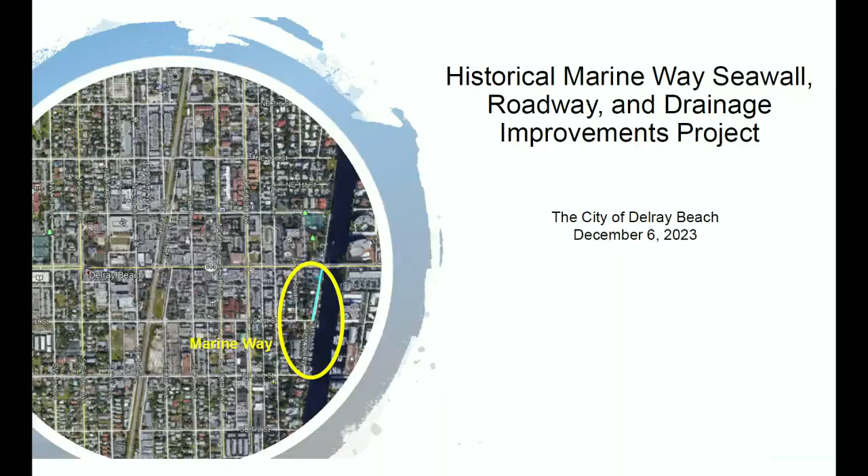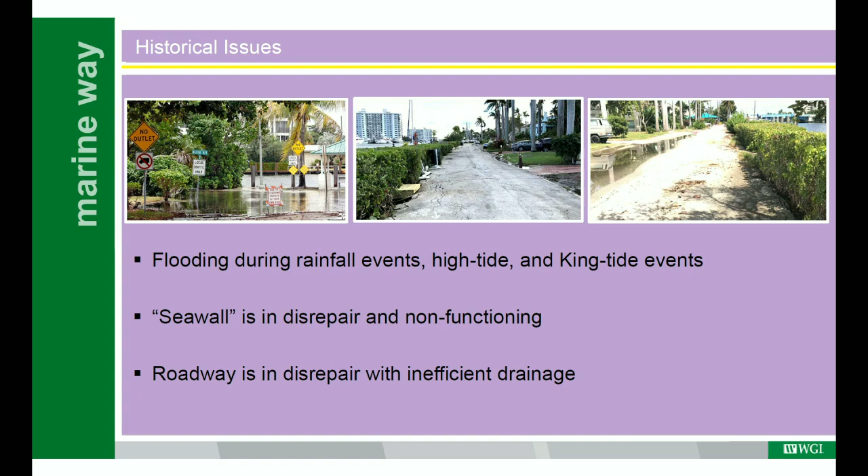Just the historical issues: flooding during rain events, king tide, high tide events, almost any tide event you get out there. There was a historical seawall that was there. It was in disrepair, it was listing seaward out into the intercoastal, and then the roadway - that caused issues with the roadway. You can see in that middle image, if I can zoom in on it, the edge of the road is just deteriorating and falling into the intercoastal.

So the original design was 3.8. It is now 4.2, and the structure is built so it's raisable an additional 18 inches in the future.

We have a stormwater pump station being installed as part of this project, along with a shared-use pedestrian and vehicular paver brick pathway connecting the city marina up to Veterans Park on the north side of Atlantic Avenue. It's the one real missing piece in that connectivity.

Roadway, water and sewer improvements, pedestrian lighting, landscaping, and we also relocated the existing city marina electrical panel from the center of the marina south, out of the way and out of the view shed of the marina itself. We'll get into that in a little bit.

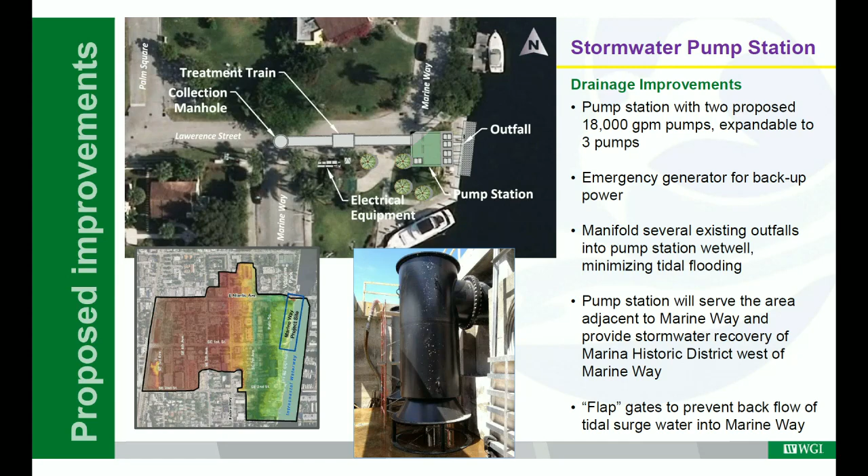We had some images from 1920 of the landscaping along Marine Way, and we tried to emulate that, keeping it as close to that fabric as we could. We also wanted to maintain as much of the mangrove section as possible, and the impacts are absolutely minimal to the mangroves, so we did a very good job there. We maintained the existing dock and didn't impact the navigable waterway.

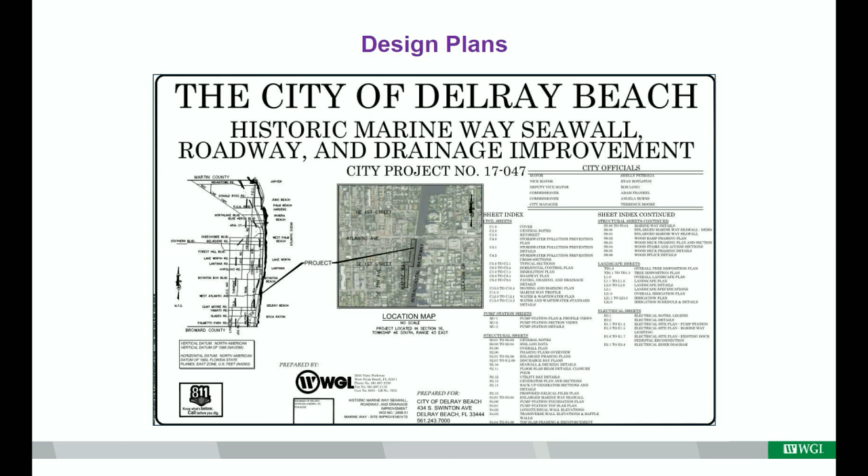Design plans, buckle up here. We've got 98 sheets to get through, so I know it's late—no, I'm kidding. We brought in just a select few of the plan sheets to make sure you understood exactly what's going on, and to talk about the intent of what we're discussing here.

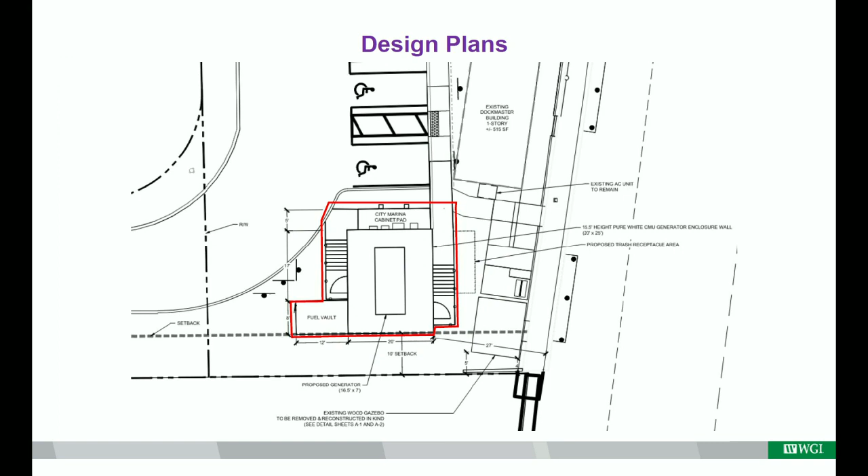That's at the very south end of the project—that's the generator building that supports the pump station, south of the existing Dockmaster's building at the City Marina. North is up on this one. This is where we're talking about; the Dockmaster building is currently up to the north here, and this is at the very south end where Marine Way and Southeast 2nd Street intersect.

You'll see the structure is a roofless structure, mostly for security for the generator and sound attenuation for the infrequent time the generator actually has to kick in. Again, it's an emergency generator—not intended to run on any consistent basis other than regular maintenance intervals.

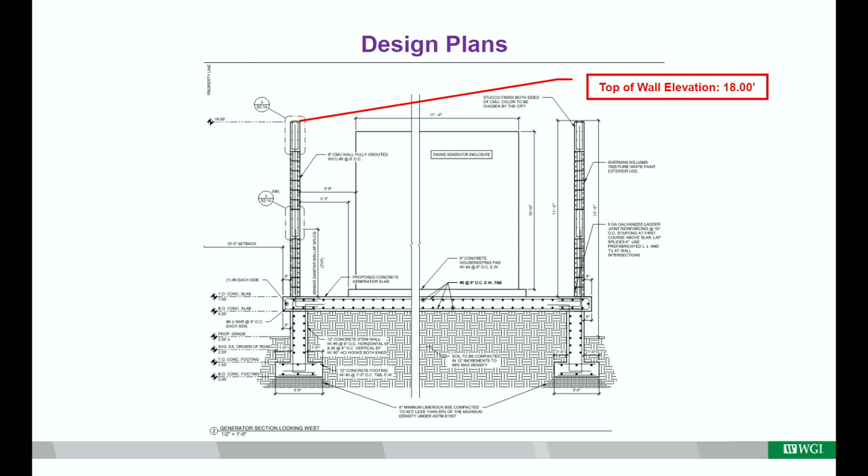The top of wall elevation is 18. The existing elevations around the building itself are about 2 to 2.5, so realistically the building wall is about 15.5 to 16 feet in height. A large part of that is because the generator has to be at the FEMA finished floor elevation of 7.0, which you heard earlier tonight as well, because of the flood zone.

This is the electrical cabinet we were talking about being relocated to the south end. I know in our public outreach meetings during the early part of the Marine Way project and during completion of the City Marina, we heard a lot of residents say they'd really like to get that out of there if they could—it was larger than they expected when it was built. So we accommodated that within these plans; you'll see the electrical panels are along this wall of the generator building now, and that's where we're going to relocate them.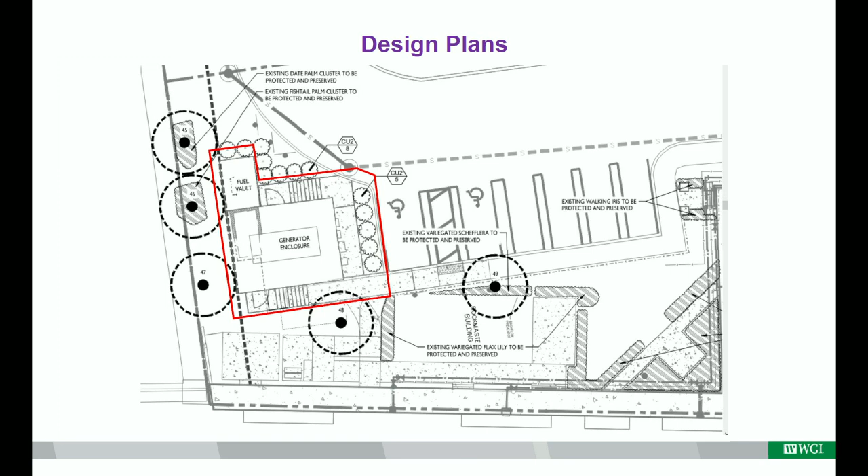Landscaping will be consistent with the landscaping in the marina right now. The only other change is an existing gazebo on the north end of the marina where our discharge pipes are going to go—all we're going to do is deconstruct it and reinstall it once the discharge pipes are installed.

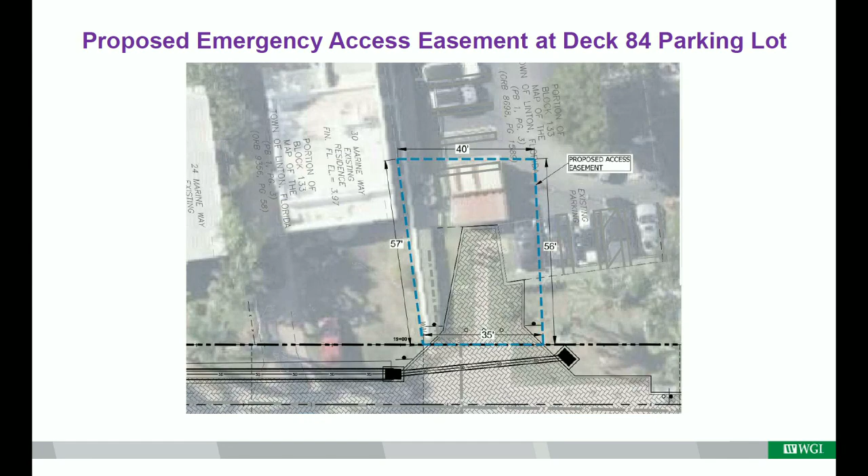This is emergency access to the Deck 84 parking lot at the north end. That was a requirement for emergency vehicles and fire. It'll be bollard protected, so it won't be a common thoroughfare for rideshare, residents, or anybody in the public.

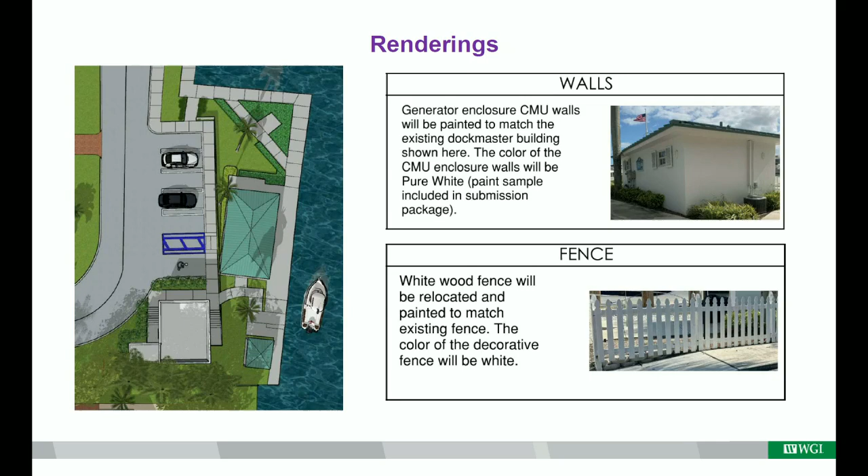The walls are going to be CMU walls consistent with the coloring and finish of the Dockmaster building adjacent to it. Any of the fences are going to be consistent with what is out there right now. That's what's projected in the plans right now. There's an aerial, kind of isometric image of what's proposed.

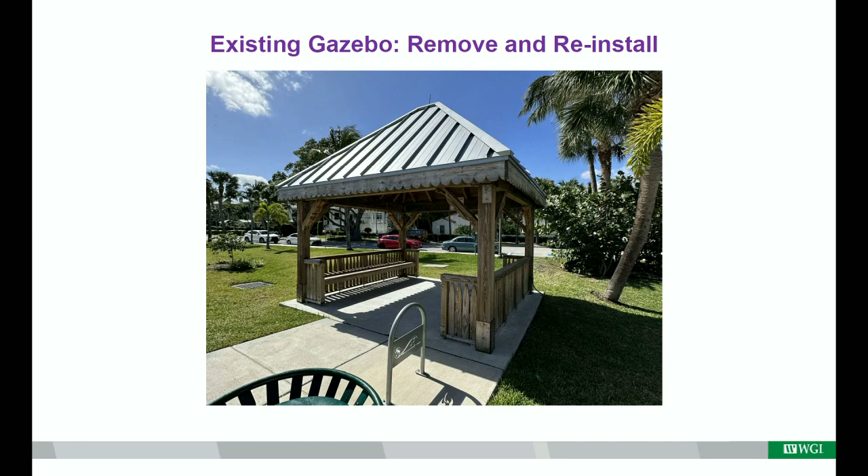These are the gazebos. That's the one that's removed and reconstructed, put back in the same place it was before. The gazebo at the south end is not going to be impacted by the construction. The existing refuse area for the marina will be moved, but it'll be consistent with the type of area that you see here, the existing one.

Thank you. Yep, you're welcome.

We don't generally have the city as the applicant. So I don't know what staff wants to do here, but I'm assuming that they concur in this, or they don't have a separate presentation? We do. Oh, you do? I'll be expeditious with it, because it's nice if we are able to get out of here by 9, right?

So there's just more so for me a little background and history for the board, some of you may remember, others may not. This came through, a similar improvement project came through with board approval previously. In fact, did the city win the award, or were they nominated for the award for the improvements that were made to the marina?

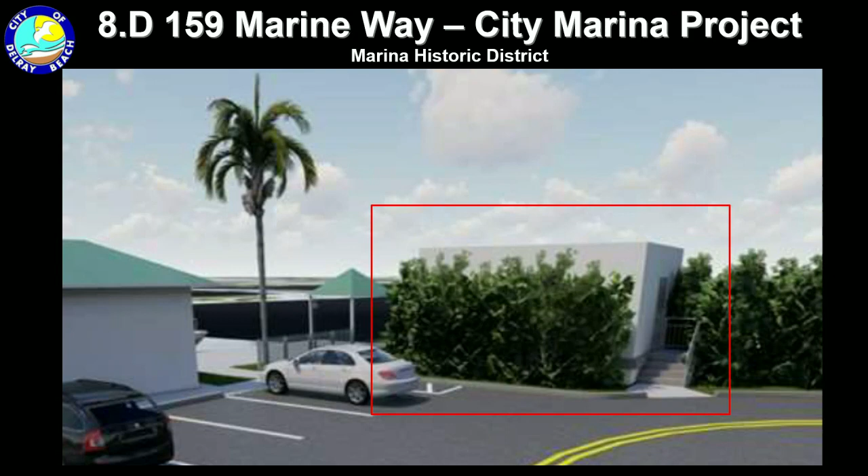Because of the stairs and because this area is within the AE flood zone, it sits up high at that 7-foot level. Similar to the discussion we had about mechanical equipment for the other project, this is a much larger scale project.

You can see here the way the building actually sits. There used to be 8 spaces of parking here, and 2 were removed in order to accommodate this. This generator is 17 foot 6 by 7 by 10 foot high, so it's a very big structure.

This is doing the heavy lift to pull water off of the streets and off of the area and get it pushed back out during king tide events or heavy water events.

You can see that the enclosure itself is 20 by 26 feet. It is a CBS wall. There is, right here, ability for a worker or staff member to get in and walk around the inside of the generator.

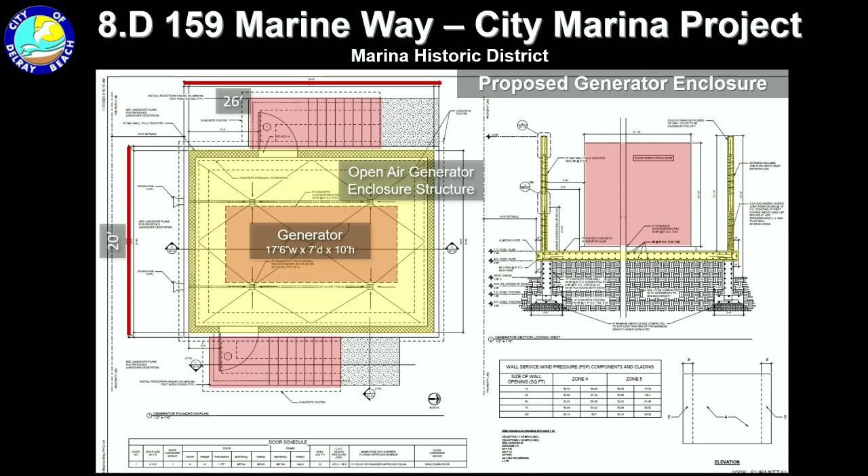The other important piece of this project is that some of you may remember there were electrical panels installed in the center of this overall project that got a lot of backlash from residents because it was impeding their view. So all of that electrical equipment is being moved to the exterior wall of the generator enclosure with landscaping around it to help soften and improve that.

That's our response to the neighbors, so that we're listening, we're hearing what you're saying, and trying to find a solution to that. Also, there is a site plan certification item we are adding as part of this presentation.

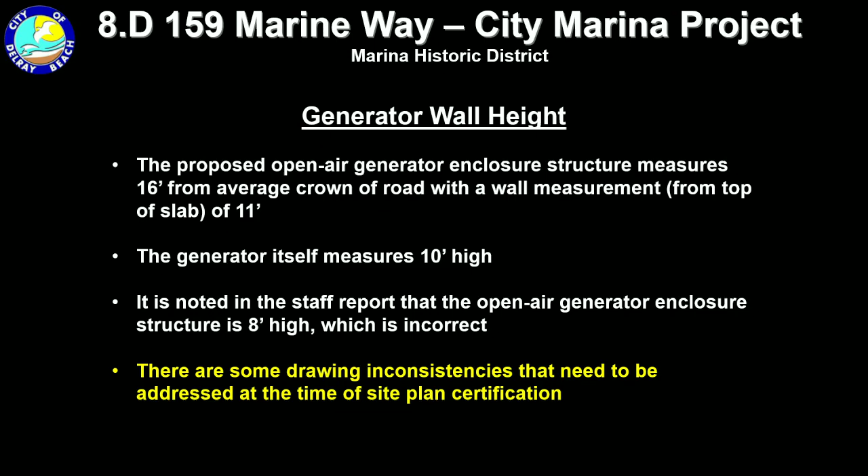In the fine-tuned look at things today before we came to the board, there's a couple of spots where one plan sheet says the wall height is 8 feet and another says it's 9 feet. So we're just asking that they go through the set and make sure the structural details are consistent.

This is really just a summary of what we've written. We've worked very closely with the applicant to ensure this meets setback requirements. For the CF zoning district, there is a perimeter setback requirement of 10 feet, and that is being met on the south property line and obviously on the north, west, and east.

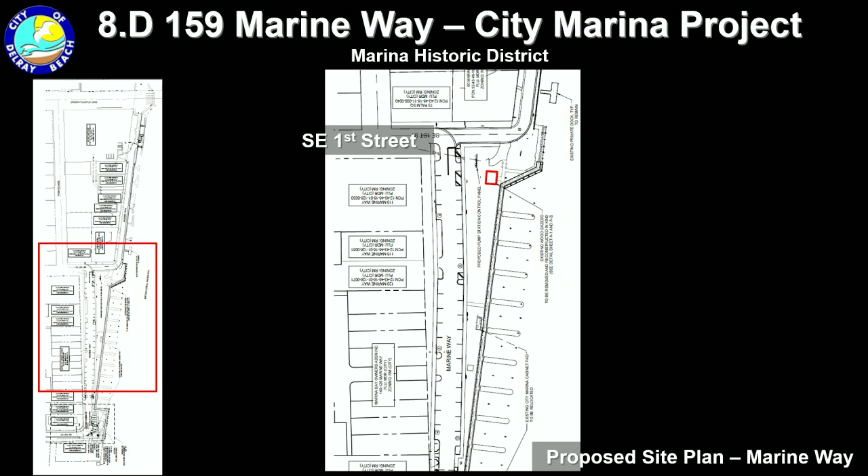These are just additional scale drawings, in case you wanted to talk about the gazebos or trellis features that are part of this proposal.

There's a site plan technical item about obtaining the proper easement or approval in relation to the Deck 84 end of the project, because Marine Way is being adjusted slightly to provide for a fire access, a life safety access drive through the Deck 84 property. The city is working to obtain the proper approvals to make that extension.

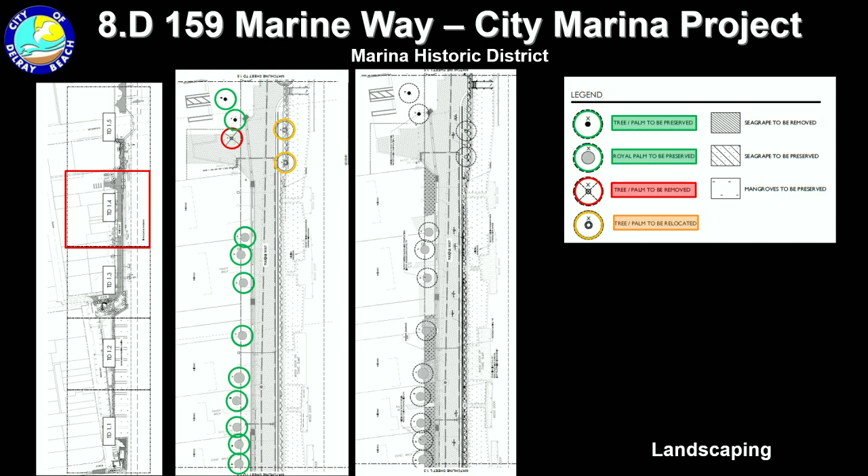Landscaping met the requirements of the code. The senior landscape planner has reviewed it, and while it is a city project with a city consultant, we still have to put it through the review process for a COA and site plan review and approval. We put the info here in case somebody had questions or wanted to zero in on any of those details.

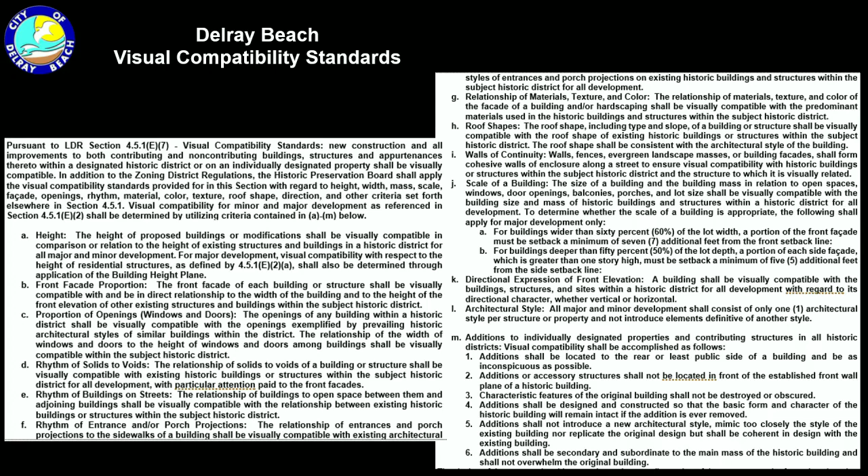I think that is the bulk of what we have to say. It's an accessory type building. We find that it's consistent with the visual compatibility standards, and it can be considered consistent with the standards and guidelines from the Secretary of the Interior. That concludes my presentation.

So I do not see any members of the public here that might make comments.

Mr. Cope, come on up. Hanging in till the end. I think of him as an applicant, not a... I know, he's a fixture here. Yeah, that's a compliment. Thank you.

I guess for the record, Roger Cope, Architects, Inc. It's 701 Southeast 1st Street in the Marina Historic District, right around the corner.

First of all, I just want to simply compliment the collaboration between our city and Mr. Kovner and the general contractor. We've all witnessed what I would define as phase one, the elevation of the seawall north of the bridge, extremely successful in my opinion. Phase two would be the marina and everything south of First Street, and how incredibly successful that was. It proved to me that this is the right contractor, if nothing else. So I'm very excited that phase three has come along after all these years. Kudos to the city, kudos to the team for pulling this whole thing off.

I've got three really simple questions.

Where does the brick paver driveway end at the southern edge of its limitations? I know it starts at Deck 84. I'm just a little bit unsure where it ends on Marine Way. Does it end somewhere near First Street, or does it?

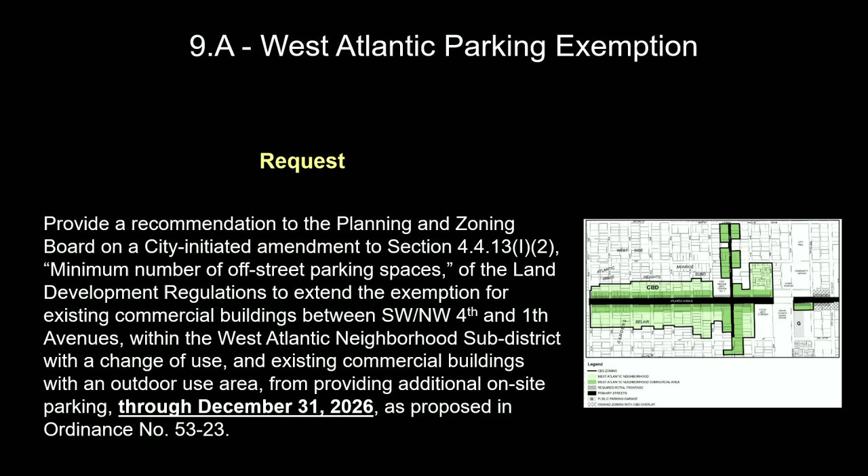So this just shows you quickly, the green area is the West Atlantic subdistrict of the CBD. And the reason we're here tonight is because a portion of that area that has the exemption is within the West Settlers Historic District.

So again, this started in 2017 as a desire to spur redevelopment by providing that incentive of not having to park your area. It was extended again in 2023, and at that point the exemption to include outdoor areas was added. So now we're just requesting to extend it to December 31st of 2026. Rather than just leaving an indefinite end date for it, we opted to bring it forward with a sunset date in case development should spur to the point where it's no longer necessary and we actually need the parking.

Currently there's an adequate number of public lots that are accessible to this area, and that was the reason for the exemption in the first place, that there's ample public parking that we don't need to require it of our businesses. And there's a number of goals that apply to this. This really helps to preserve the historic form of existing structures because they aren't tempted to really max out their use, to make the extra parking really able to pay for that. And it's just supporting small businesses who may want to use some of these small structures.